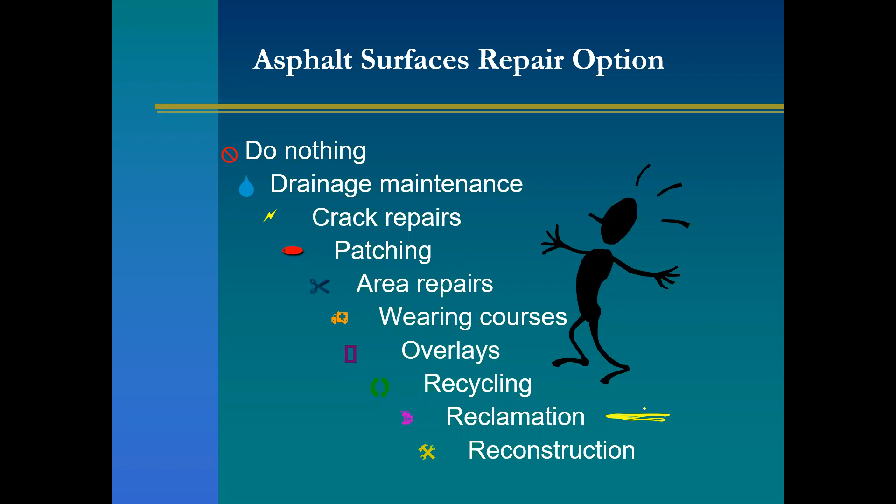Always going to bring up drainage. You know, there's only 3 things that matter. What are the 3 most important things when it comes to drainage at roads, Ed? Remember that joke? Yeah, drainage, drainage, and drainage. Absolutely. See, he can read my mind.

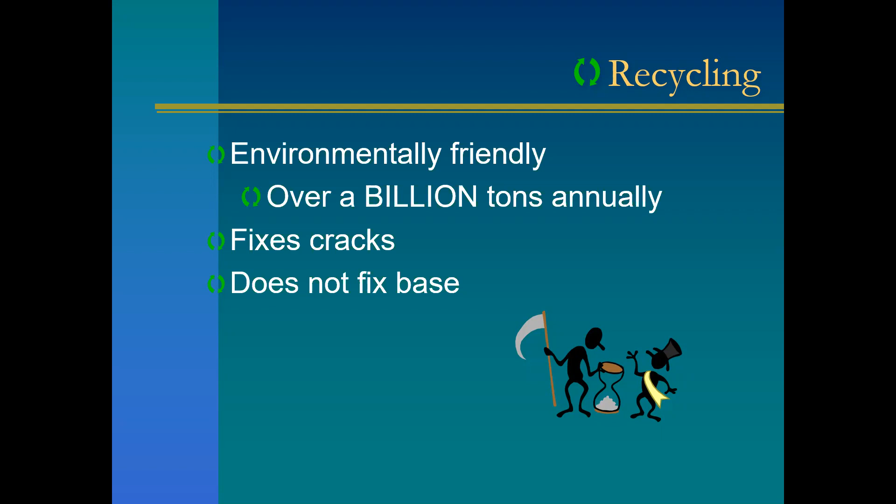Now, some people think of recycling when we talk about FDR or reclamation. We're not. I like recycling. It's environmentally friendly. We recycle over 1 billion tons annually in the United States of asphalt concrete. It fixes the cracks in the surface, but it's not fixing the base. And so when we're talking about recycling, that's not what we're talking about today in reclamation. And of course, there's lots of choices.

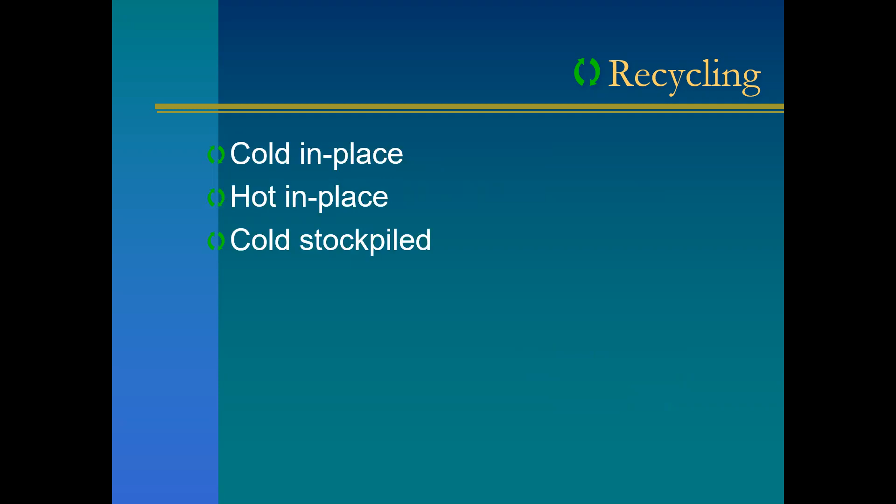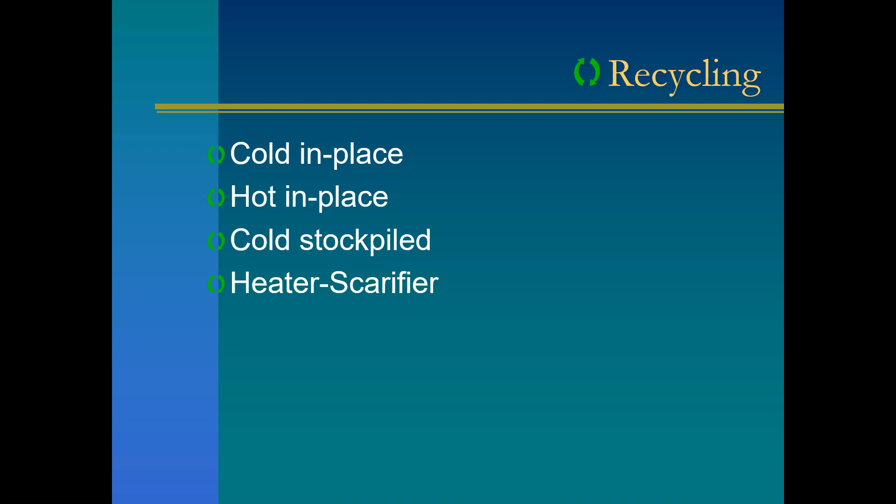Go ahead, Ed. Hot mix asphalt is the most recycled material on the planet. Yeah, absolutely. And we don't want to throw it away. It's too good. It's too valuable. Even when it's alligator cracked and starting to break up, it's still pretty good stuff. But we got to do it correctly. We've got to use good choices. But remember, recycling fixes the surface. Okay, so if we recycle the stretch of roadway, if there's a base problem underneath, we're not doing anything to fix that. And of course, there's recycling trains, and they work very effectively.

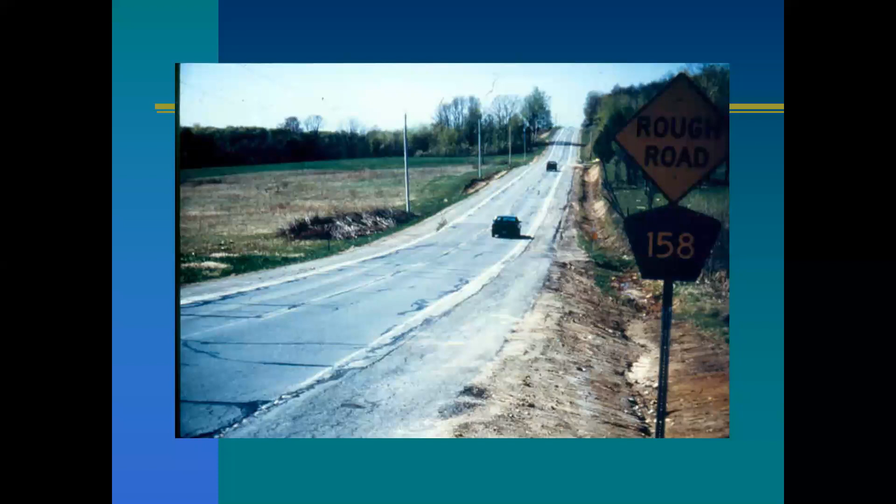So we talked about this again in a previous webinar, and you can take a road that looks pretty bad. If it's got good drainage and you maintain it properly and you recycle it properly, well, that road can be pretty good when you're done. But remember, recycling is dealing with the surface, you know, just a surface crack, maybe an old pavement that's starting to get just worn out with age, maybe a patch or 2, but not major issues underneath.

And you also have to have enough material there to recycle. Yeah, minimum 4 inches, hopefully 5. And unfortunately, a lot of local roads don't have that much material. Yeah, you got to make sure you have enough thickness. And we'll talk a little bit about the thickness you need at the end of the process. And we did that with another webinar as well.

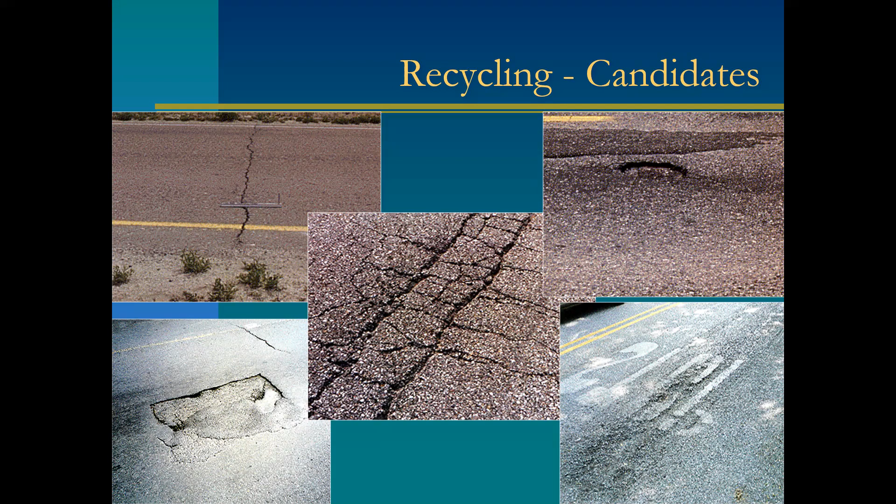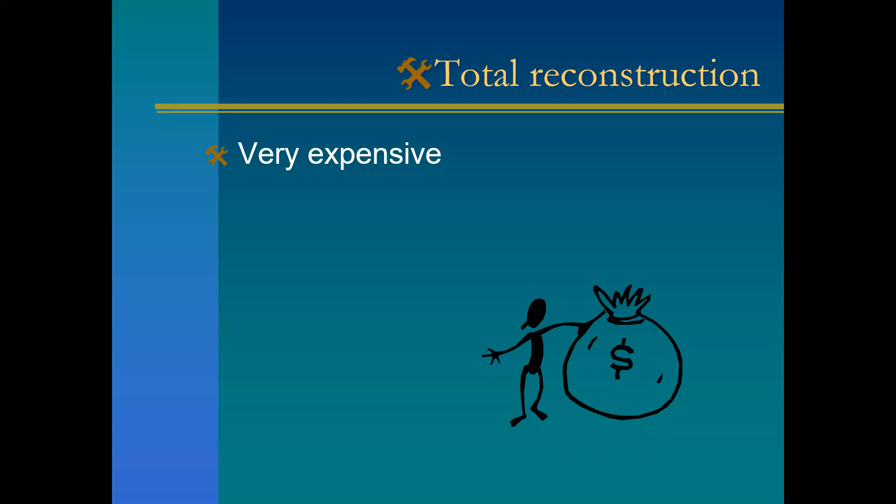And then the other thing people sometimes want to jump to is total reconstruction. Total reconstruction is very expensive. That's when we're essentially starting over, throwing everything away, putting in the big piles. It may be the only option, but when you're done, you do have a brand new roadway, so I like it. Most commonly, we see reconstruction at the local level when people are putting in utilities and doing major utility work.

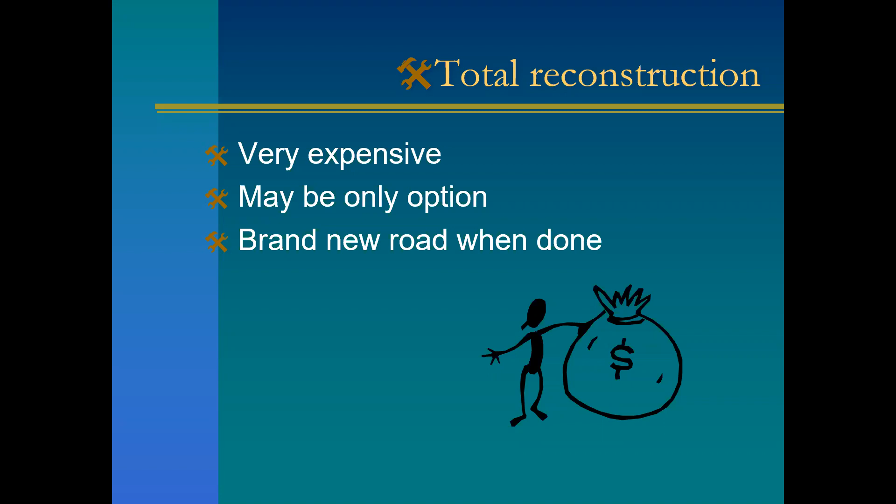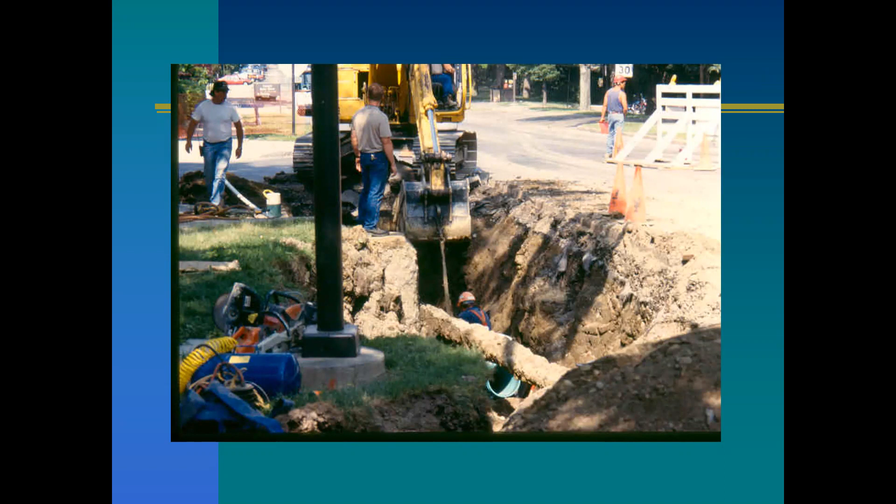And this is my OSHA slide, or lack thereof. We could spend a whole webinar just on this one slide almost. But the whole point is, if you're going to reconstruct a road, do it right. We don't want to use that famous motto, we do it nice because we do it twice. Let's build it up properly. And when you're done, you have a good roadway. This is actually a road on the Cornell campus that was built.

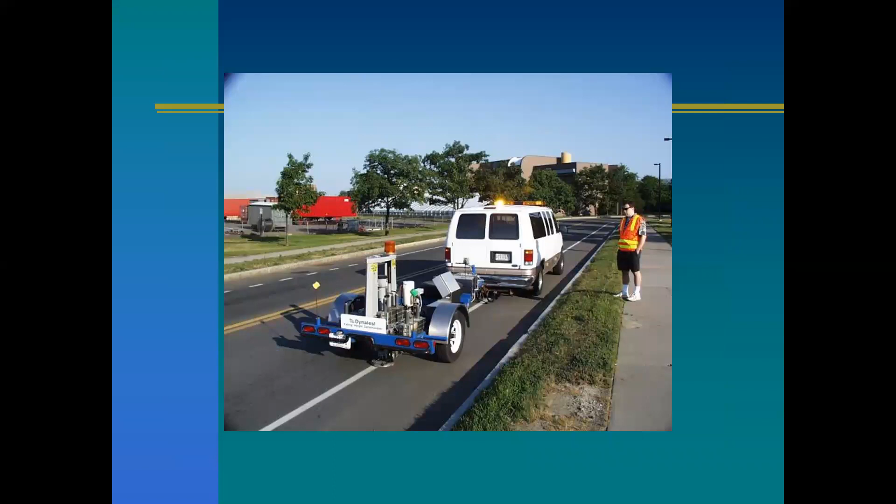Boy, it's about 19 years old now. And it does need a wearing course, but it's in pretty good shape. So what we're talking about today falls in that middle category between recycling and total reconstruction, reclamation and stabilization. It's almost a new road. It does repair the base, and it can be very, very cost effective, okay?

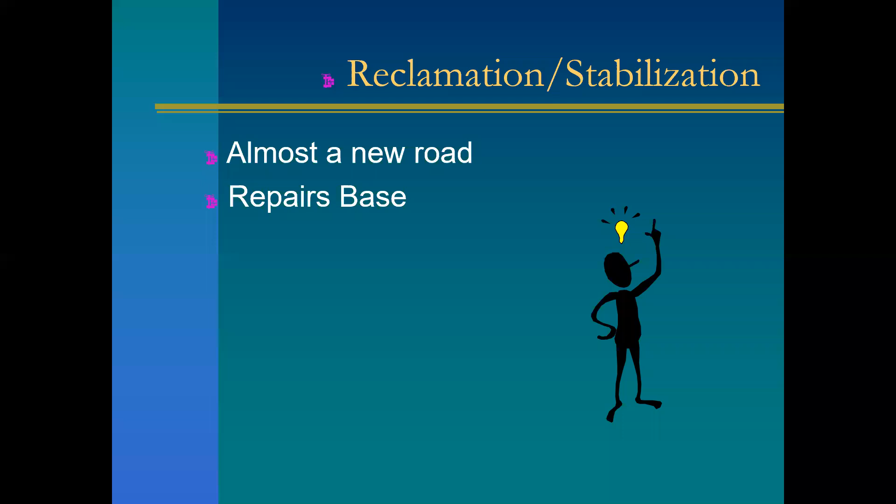But there's a couple of things to keep in mind, some keys. First off, you gotta pick good candidates and you gotta improve the drainage. If you can't do that, then it's not gonna be a good candidate. And then you have to choose the correct additive. You have to choose the correct technique for the reclamation at the end of the day, okay? What do I mean by that?

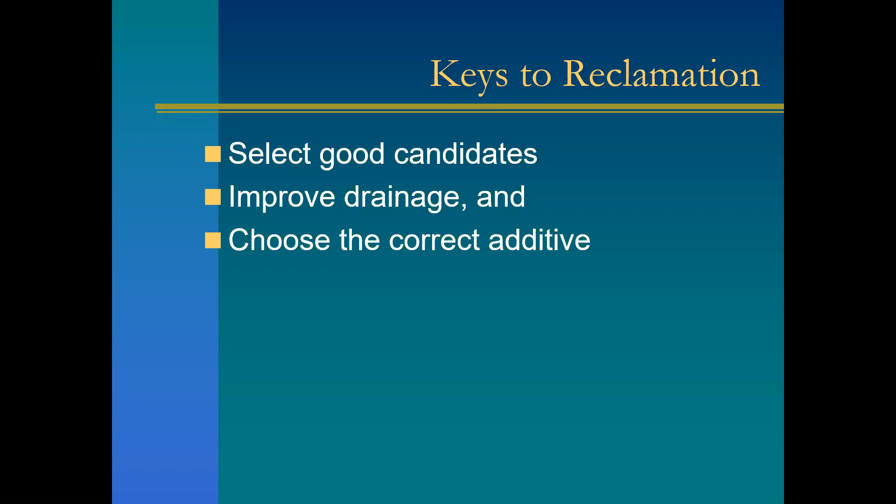Well, here's a chart. This is a textural chart that shows you the percentages of gravel, sand, and silt and clay in the base underneath the paved road and even on the surface, okay? It's one of the tech tips I mentioned earlier. What we want is the gravel content to be about 50 to 70% because that's where the strength is. We want the fines, the silt and clay, to be under 8%. And we need enough sand to fill in the voids. And so we'd like to be in the blue.

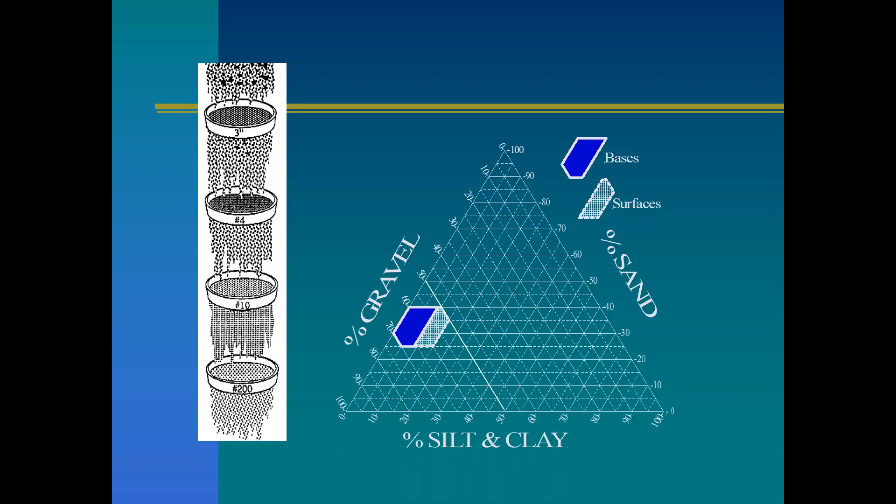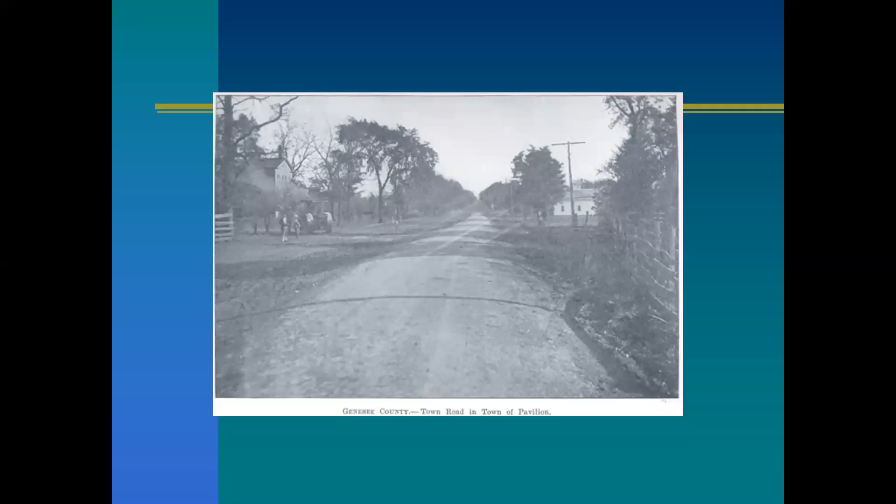But the problem is most roads started as gravel. And when we paved over the top of them, we may not have cleaned that quality of that gravel up, or it may have deteriorated over time. So we'll close up in on the good portion of the chart. If we've got a section of roadway, and let me make sure I got a yellow pen here. I do have a yellow pen. So if we've got a material that's a little bit dirty, it sits up in here in this dirty area. Might have made a good gravel surface, but it's not a clean base.

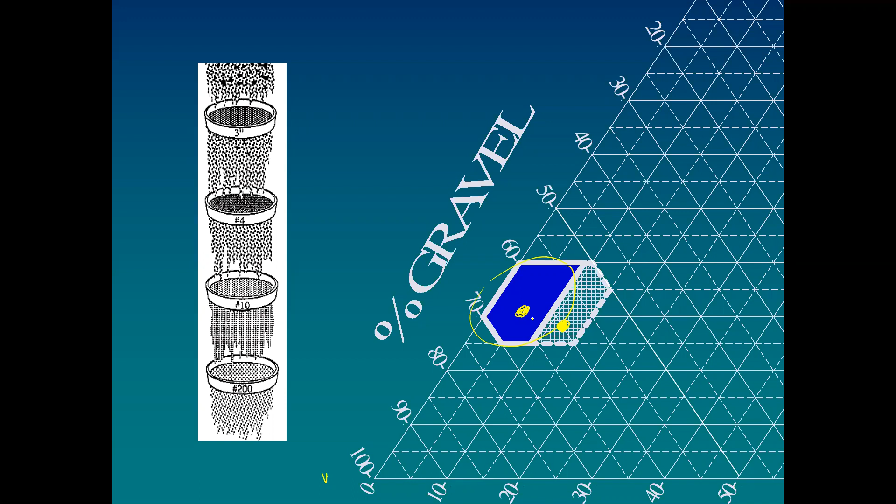Well, that's a good candidate to reclaim it and bring it down into the blue zone by binding up the fines, cementing the fines, or bringing in new gravel and blending it together so that when we're done, we're inside the blue zone, okay? Now, we're not going to get into the engineering techniques of exactly how that's done, but I do want to remind you that there are different ways to stabilize, to bring materials from outside the blue area into it, by binding or cementing or mixing, okay? And so there's different choices.

You could just pulverize the existing material and blend it all together, and when you're done, the blend is inside that blue zone. You could do mechanical stabilization, which is a fancy way of saying, I'm just going to bring in some rock, add it to what's already there, and when I'm done, I'm going to have a cleaner material.

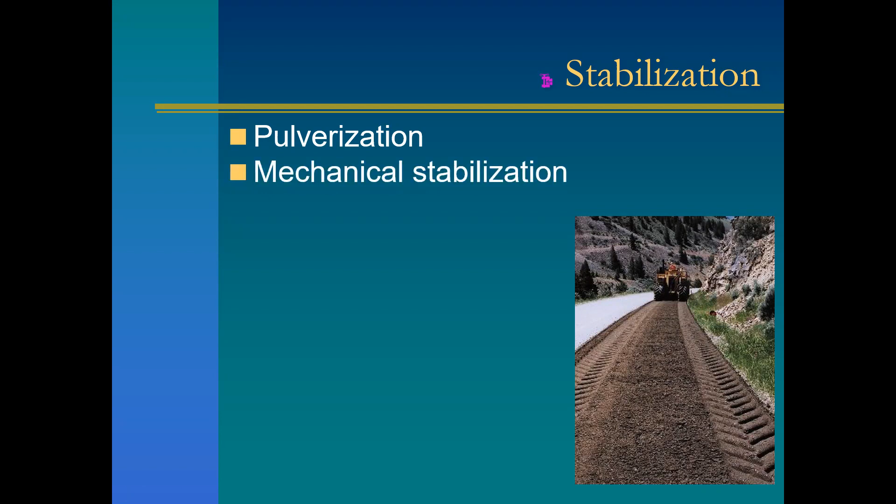I could do chemical stabilization where I bring in calcium chloride, a salt, to help reduce the frost issues. I could bring in cement or fly ash to help bind things up, or I could do asphalt stabilization with bituminous products, emulsion or foamed asphalt, or a combination thereof, okay? We're going to go through each of these in more detail, but before I do, let me go to poll question number 2.

And let me see, which ones of these have you done? You can select more than one choice. So I'm showing you mechanical stabilization, calcium chloride, cement, lime fly ash, emulsion, or foamed asphalt. Which of those have you done, had experience with?

And Ed, we don't get to vote. That's okay. I never do anything. Just watch. Just watch. So we'll see how many folks have clicked through here. We'll give them a couple minutes. Well, actually, we'll give them about another 20 seconds or so, see what people say. Probably should have put a none in there as a choice, but that's okay. Okay, so we're in the polling.

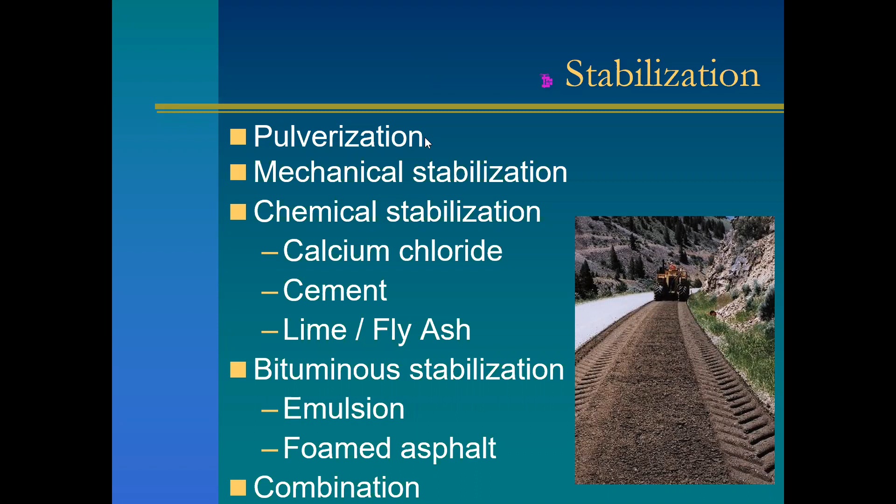Okay. So we can talk about different techniques when we're done. This was a demo we did at the highway school a few years back where we did cement stabilization. In fact, there's Lynn Irwin, the old director, as we were doing the road, and that's the product after it was done. If it's done well, stabilization works really, really well, but you've got to do it correctly. If you don't, you can lead yourself into trouble.

So now I'm going to let Ed talk a little bit about the full depth reclamation process. I'm going to do my best to keep up with you, Ed, on the slides. It's all yours. Sure, thank you. We're going to go into a little more detail about FDR right now. The New York DOT has a definition that full depth reclamation is a recycling method where all of the asphalt pavement section and a predetermined amount of underlying sub-base material are treated to produce a stabilized base course.

It's a pretty good definition by an agency that really doesn't do much FDR, probably almost none, because they really don't have a whole lot of base failures because most of their bases are Portland cement concrete pavements. Just wanted to comment here that there's not a whole lot of work zone traffic control in this picture. Looks like an idyllic place to do some reclamation.

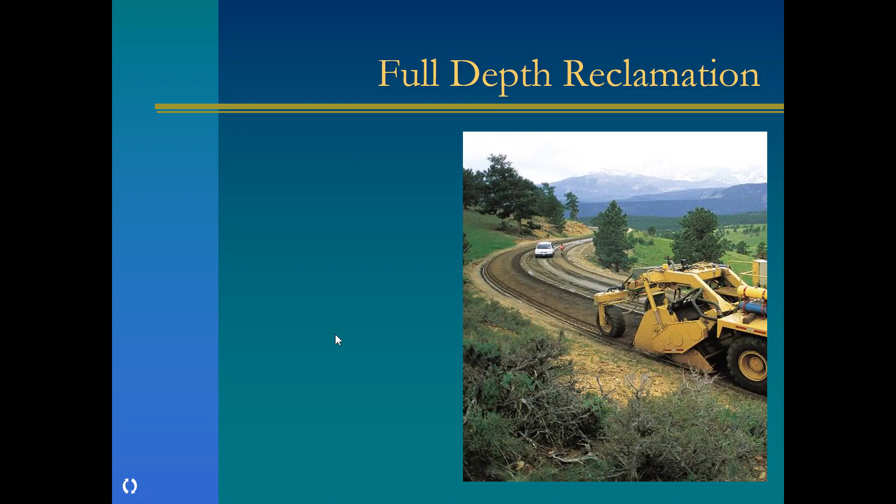So when do you use FDR? As Dave already said, inadequate pavement structural strength. Mostly it's one of your last choice treatments before reconstruction. You can't recycle a pavement that has severely inadequate structural strength unless it's in very localized areas. At that point, you're going to have severely cracked pavements, poor ride quality, bumps, holes and potholes, or some rutting and corrugation, slipping, delamination and/or stripping, and also some raveling and even bleeding. FDR can fix almost all of these issues.

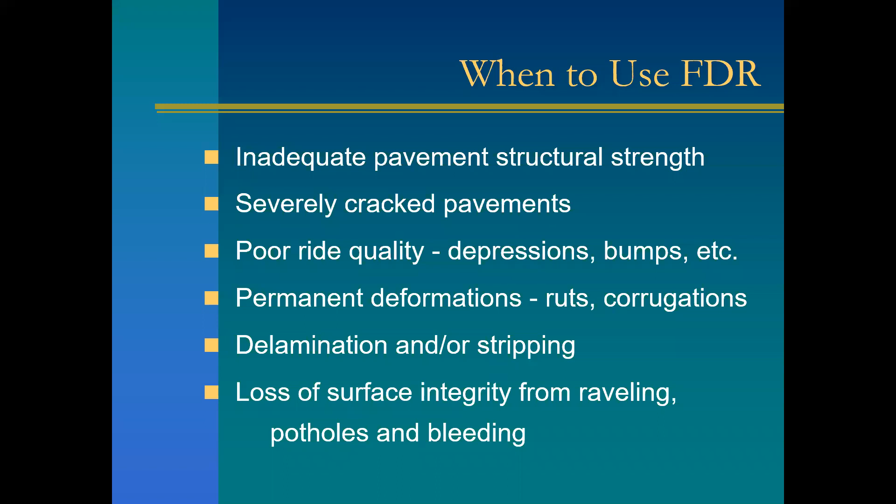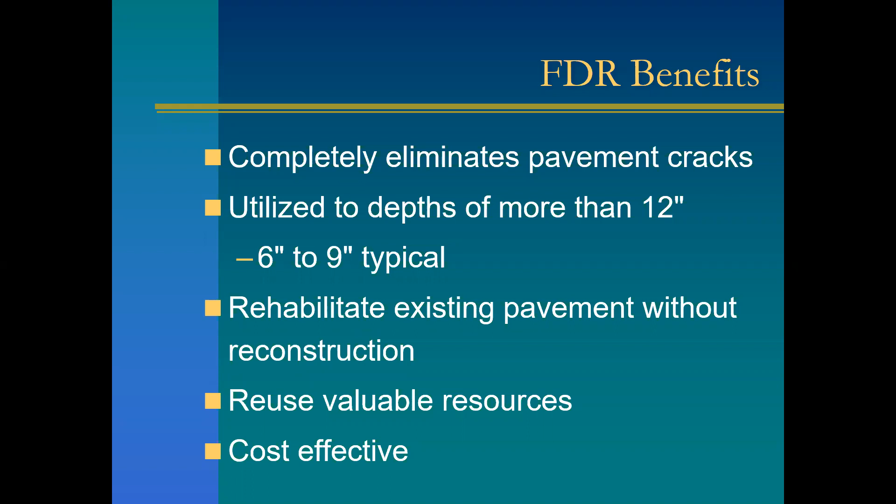And what does it do? What do you end up with? Well, it completely eliminates pavement cracks. You can FDR to more than 12 inches, but that's pretty unusual. Typically, we'll go 6 to 9 inches. You're able to rehabilitate the existing pavement and some of the base without reconstruction. We're being environmentally green, reusing valuable resources, and it is cost effective. The most important thing is that we get the structural strength in the pavement back, I believe.

I agree with you, if you've got good drainage. Well, you have to address the drainage first. You have to go out and recut the ditches if necessary, find some areas where maybe there's some springs coming through, address the culverts, etc. Because if you don't, you're just putting lipstick on the pig.

Some of the equipment used for FDR is very specialized, and some you see every day. This road reclaimer is very specialized. It's a big piece of equipment, 400, 500, 600 horsepower. It does a lot of things, and we'll get to it in a little while. The usual grader you see all the time. Rollers, some you see all the time, some a little specialized. Water truck, dump truck, stone spreader, and you've got to get the additives applied in a calibrated manner. Sometimes you do that with the reclaimer, and sometimes you do it out ahead of it.

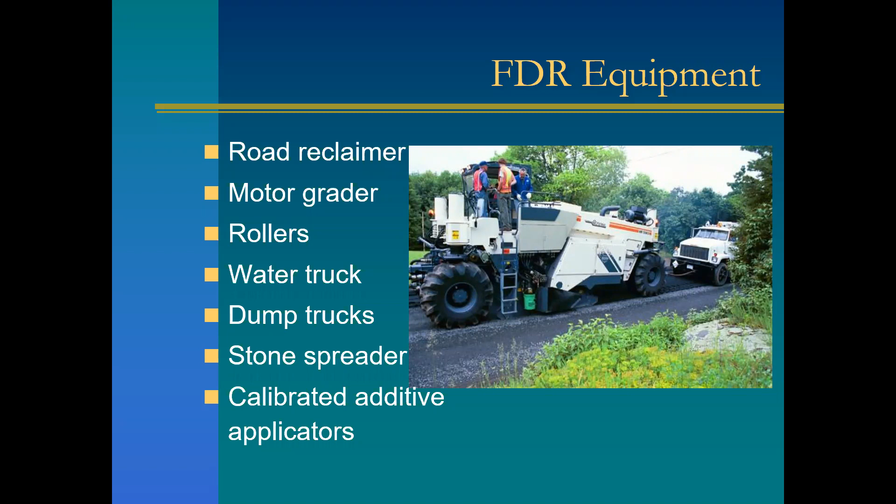Yeah, yeah. Well, I've been underneath a regular milling machine while the guys changed all the teeth, and it's kind of fun to see. I mean, it's horrible to actually have to do it.

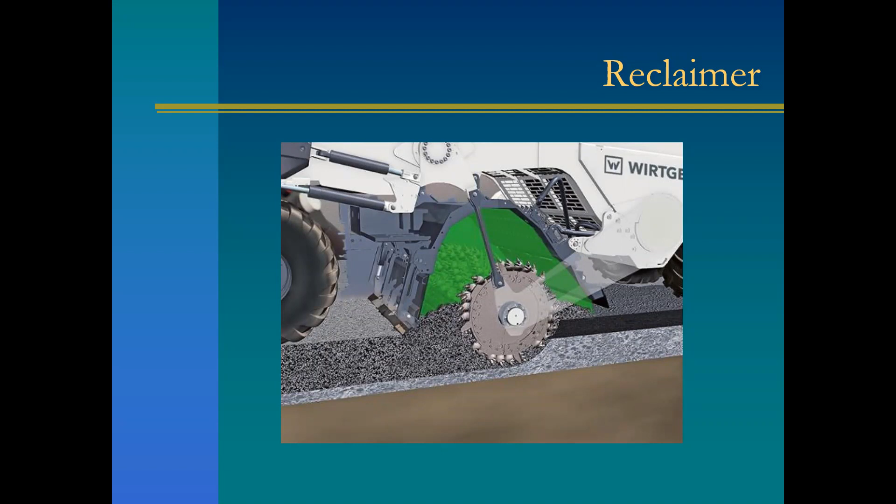Next, we're going to see another schematic of a reclaimer. This shows the actual operation. The machine is moving to the right. The milling drum is moving in an upcut direction. It's going down into the granular sub-base material, taking the whole pavement up. And if you notice up in the top there, there's a little injector where you can inject water and or fluid stabilizing agents, calcium chloride, liquid calcium chloride, etc. Almost all the modern reclaimers now have those installed.

And this particular picture I noticed doesn't show the baffles. There have to be some baffles in here, otherwise you get too big of chunks. You've got to make sure that it gets ground up with these upcut machines. That's pretty important. Correct. Yes, yeah, because the regular milling machines do use an upcut, and they take the material away to be crushed at a plant. Whereas if you do a recycling project, you've got downcut machines that actually size the material better. Yep. Dave will talk about the additives that are injected into the drum a little later.

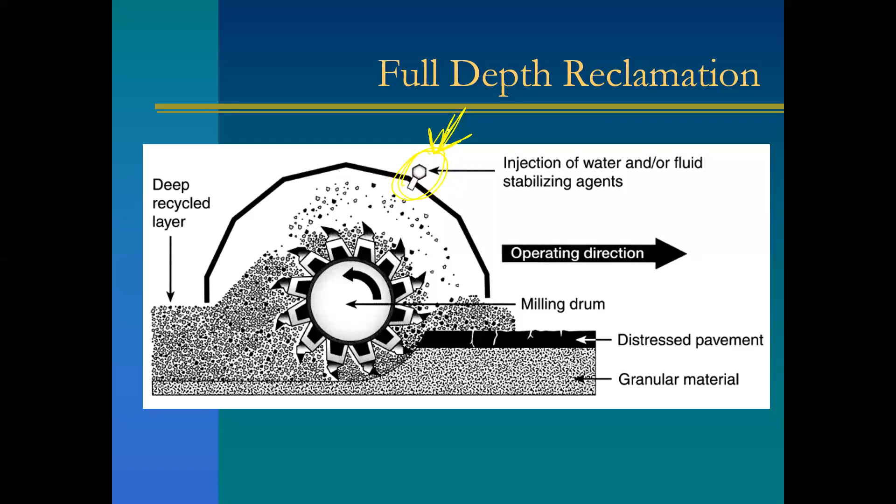So full depth reclamation, I've got another definition for you. This one comes from Dave. It involves rototilling a road and blending the pulverized pavement with its underlying subbase or subgrade. Many times a stabilization such as asphalt or cement is added to increase the strength of the reclaimed base. It's a pavement rehabilitation technique in which the full flexible pavement section and a predetermined portion of the underlying materials are uniformly pulverized and blended together to produce a homogeneous stabilized base course.

And if I got a little distracted there, it's because the town highway department's just going down the road in front of my house, patching potholes. And they do have a roller, and he's actually going to do more than one pass. So he's compacting it. That's good to hear. Absolutely, and I think it's definitely hot mix. Let's see, 3 passes, that's it. Well, hopefully it'll last.

So during the construction process for FDR, analysis and testing is probably one of the most important parts of this, besides actually doing the work. Not all steps are in every FDR project. This is kind of a typical list. Usually the contractor will do the analysis and testing, unless you're a state highway agency and you have a lab that you can use. But it's important to understand what's going on so that if the contractor says to you, I'm going to use X additive, you can say, well, explain to me why, and you can have some understanding of what they're going to do.

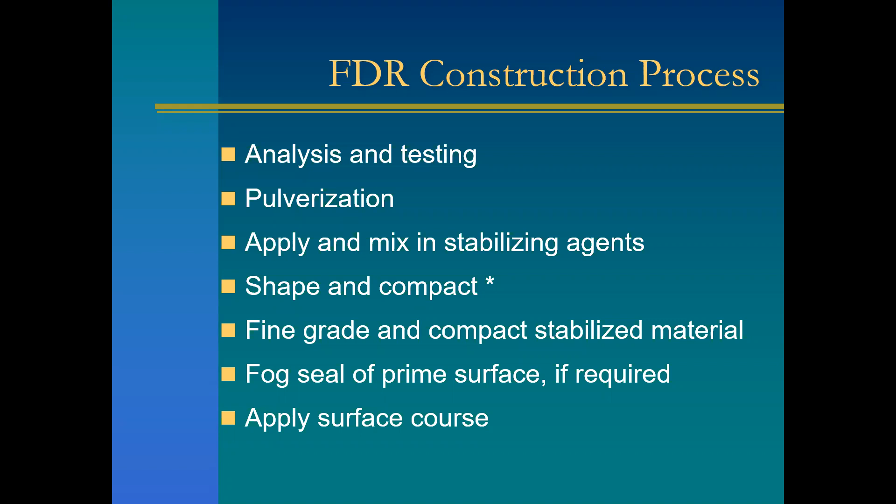But the key is you've got to do a test. You've got to get underneath and see what you've got. You can do cores. You can do a larger test pit, which I like. You can also just do a small, like a 3x3 square, and dig down. But the key is you need good quality testing, and you need enough of it. That's probably the biggest issue I see, is we try to do one test for a whole long stretch of highway.

How many tests would you typically see in a mile, Ed, for the work y'all were doing? It's 4 to 6, I believe. Yeah, 4 to 6 is typical. So you may not do a test pit in every single case. Maybe you use small holes for most of them, but 1 or 2 test pits, especially where you're concerned about drainage or what's underneath, can be very helpful. So we'll do 6-inch cores. Yep. And you do it 1.5. We'll talk about it a little later, but it's 1.5 times the depth of the FDR. Right.

So candidate selection: low volume roads, less than 2,000 AADT, and that's kind of critical because maintaining traffic on these kinds of projects is difficult, and you can't have 8,000 vehicles coming up and down the road while you're trying to do an FDR project. Well, there are people who do them. I know there are. The challenge there is the traffic control almost as much as it is the QA/QC on the FDR itself. Right. Well, it becomes cost ineffective if you have to do that kind of work. But people have done it. I've seen people do chip seals on I-95 in Virginia. So there are ways to do difficult projects. Sometimes you have to search for the solution.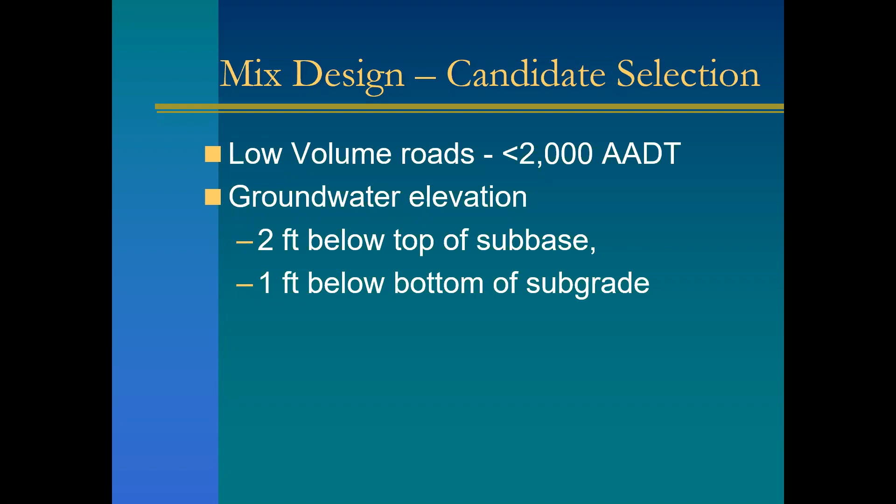Yep. Groundwater elevation, and this is important. The groundwater has to be below the subbase by 2 feet, or at least a foot below the bottom of the subgrade, because if you have groundwater coming into your project, it's a recipe for disaster. And for those who are listening, what'll happen is the water will actually be pulled up by capillarity right into your new material, and it'll be too wet and it won't survive and break down in the spring. So yeah, it's part of that drainage issue. Okay.

Now this is a little bit of what comes first, the chicken or the egg. You've got to determine the full depth reclamation depth, somewhere in the range of 4 to 12 inches. Like I said before, it's usually 6 to 9. If you know the road history and you know how much blacktop is there, or if you know how much gravel is underneath, you can pick a number. But the number will be determined after you do the coring. Your core should be 1.5 times the depth you're talking about. So if you core somewhere around 12, 13, 14 inches, you should be okay.

You've got to do 4 per lane mile to get enough material. Plus, things change over the course of a project. You don't really know how many changes in road cross section there are, unless you've been on the highway department for a long time. And then once you've done the coring, you can adjust your depth. And so you may wind up sometimes purposely going a little deep with your cores just to be sure. Absolutely. Coring is cheap. Usually the contractor does it. When I was with the contractor, we did coring for nothing. And even if we didn't get the project when it went out to bid, that was just considered a cost of doing business.

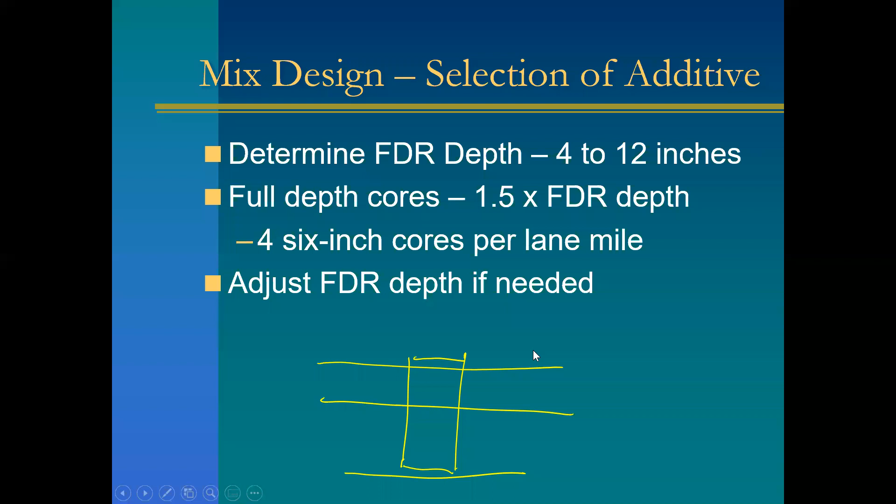Now, this is where the contractor's lab comes in. They're going to test for moisture content, sieve analysis, hydrometer particle size analysis, and liquid limit and plastic limit. And this is the kind of stuff that I've never done. That's really beyond my capability, but I know our lab guys, when I was with the contractor, knew it backwards and forwards. And when they came up with a recommended additive, it was because they were testing and finding out what was going on in the soil.

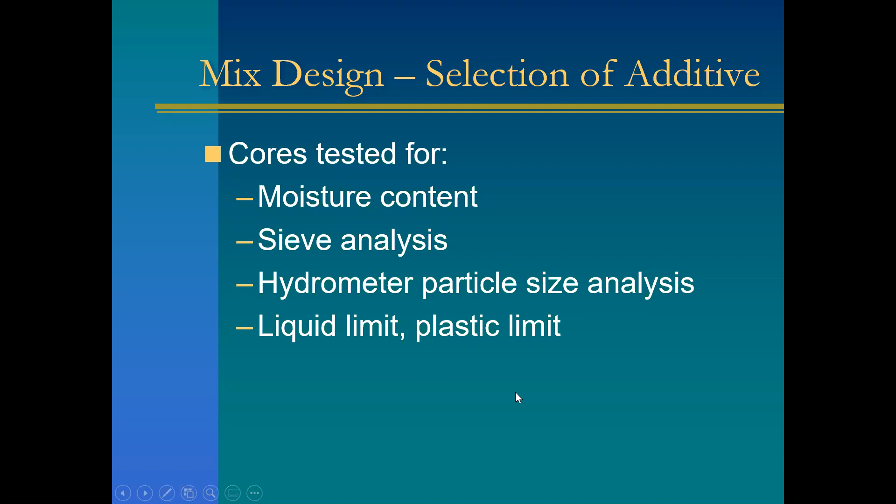This is actually pretty important. We're just about to launch into a project where we're going to look at these techniques for choosing the stabilizer. We may add a test to this list, the sand equivalent, when all's said and done, but it's really critical to do these tests, because if you choose the wrong stabilizer, you can actually make the problems that you didn't want in the first place. We'll talk about those when we talk about stabilizers. Right. Yeah, I was going to say Dave's going to address all this: what the contractor does with these results a little later on, picking an additive.

Going to look at a few reclaimers here. This is one of Dave's photos. He told me it's an old Bomag. I've never seen this piece of equipment. I'm sure it's got a milling head inside that container there.

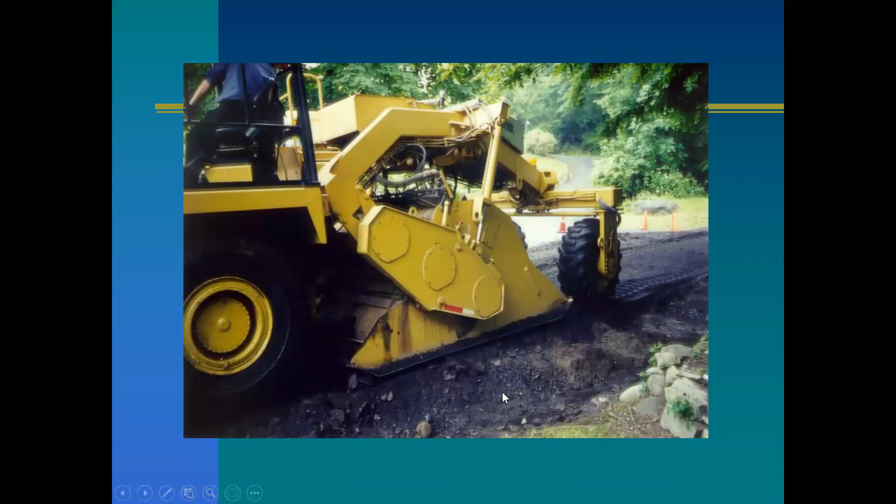The reason I like this picture, Ed, more than anything else, is to show that you can use FDR in some pretty tight spots. This is a dead-end road with no right-of-way. Literally, it's a road by use, and they actually were able to reclaim the road in an extremely narrow right-of-way. Almost a perfect application of FDR technique. Okay. That's why you're using it.

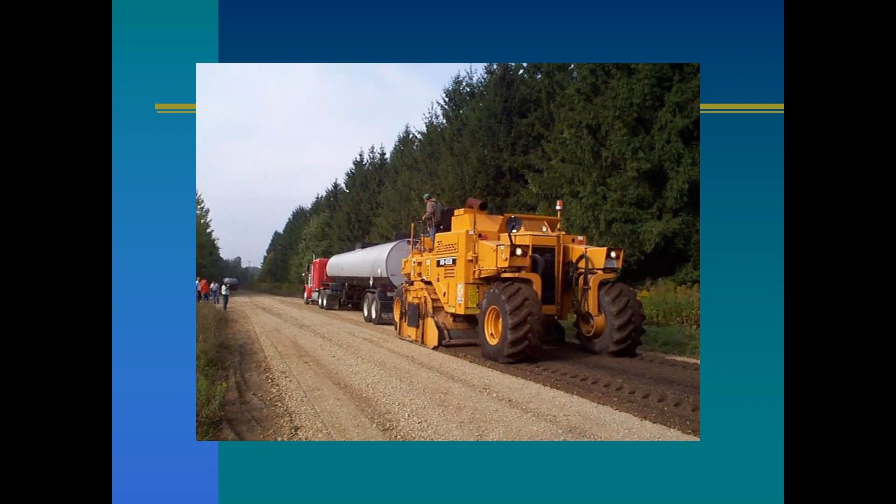The next is a Caterpillar brand. There is a tanker in front feeding liquid calcium that's being injected into the milling head, and that's why the material looks a lot darker when it comes out the back of the machine. I'm not sure where this picture was taken. It's a U.S. Forest Service road out west. It was actually taken by Lone Urban. Okay. Looks like they're doing a nice job. I think the other side of the road has already been done, correct? I think so, yeah. And it's cured a little bit.

Here's the old Bomag. I know a lot of people, when I was talking to town highway superintendents, have used Bomags in the past. This is basically just using some water. Looks like we got some drainage issues on this road. Hopefully they have addressed them, or they're going to sometime soon. You got any comments on that photo, Dave? The main thing is that they were just trying to adjust the water content before they compacted it. You need to have the right amount of water. That's part of the testing process. Absolutely, absolutely.

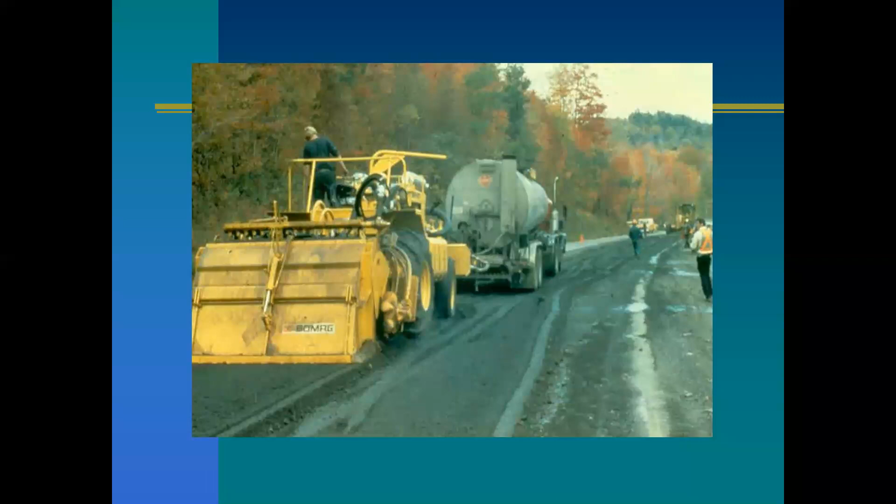Here's a show of the rolling operation here. There's a pad foot roller, sheep's foot roller some people call them. I don't know how many people have actually seen one of those outside of reclaiming jobs. It's kind of used on deep soil compaction, because that's what it's meant to do. You got to get that pad foot roller up in the back of that machine as close as you can. And you end up getting a more concentrated compaction with a pad foot.

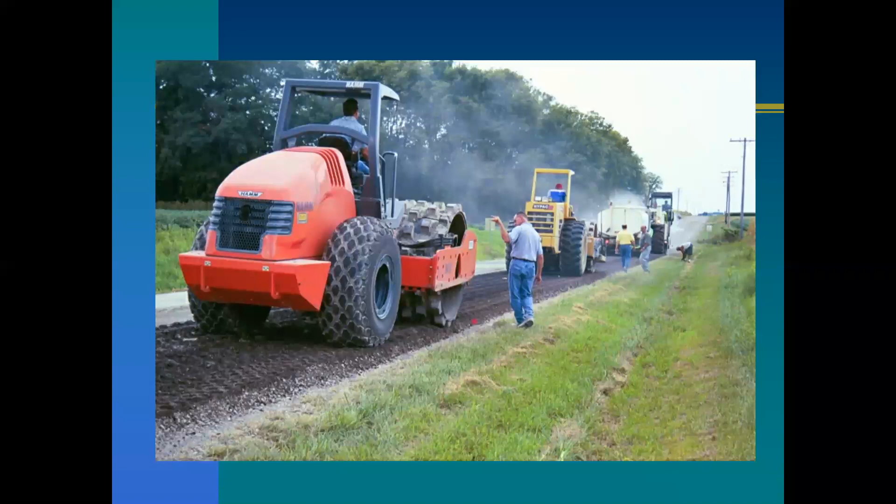Just the process for grading and compaction here again is a pad foot roller doing the first pass behind the reclaimed material. One of the things important about the sheep's foot or pad foot rollers is they knead the material into place, and they maneuver it around as opposed to just rolling over and trying to press it down. So that's why it's pretty important to use that in the first pass. Right. Well, like I said, it's done on deep soil layers, and that's what it's designed for.

Actually, the sheep's foot name comes from sheep. There were people, probably in jolly old England, that used sheep to walk on paths and compact them, or they were just doing it as part of what sheep do.

The grader follows up for the first pass after the sheep's foot roller. Picture of a grader here, garden variety grader. I haven't worked with any of these ones that are controlled by satellites, but it's quite an innovation, and I wonder if any of you folks have actually seen them yet, because they're making their way in. Well, let's see. Raise your hand if you've actually seen a satellite-controlled grader operation. See if anybody raises their hand here. A couple of people have. Oh, okay. Cool. But not many. Okay. It's coming. It's coming. Yeah. You never know. They'll be driverless after that.

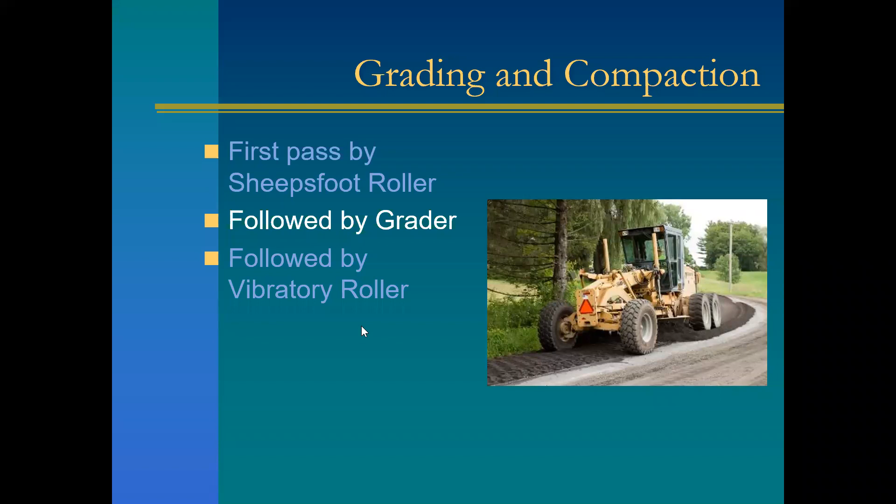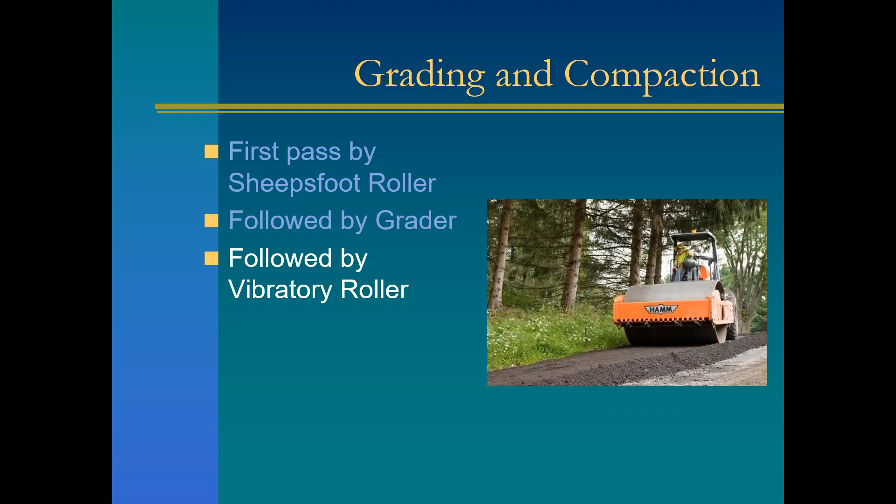And then after the grader, you follow up with a vibratory roller, typical garden variety single drum vibratory roller. As I said earlier, FDR is usually done 6 to 9 inches. You can do 12 to 16. That's going to seriously slow down your production rates, which average anywhere around 25 feet per minute, which basically computes to 1 to 1.5 miles a day of a 2-lane road.

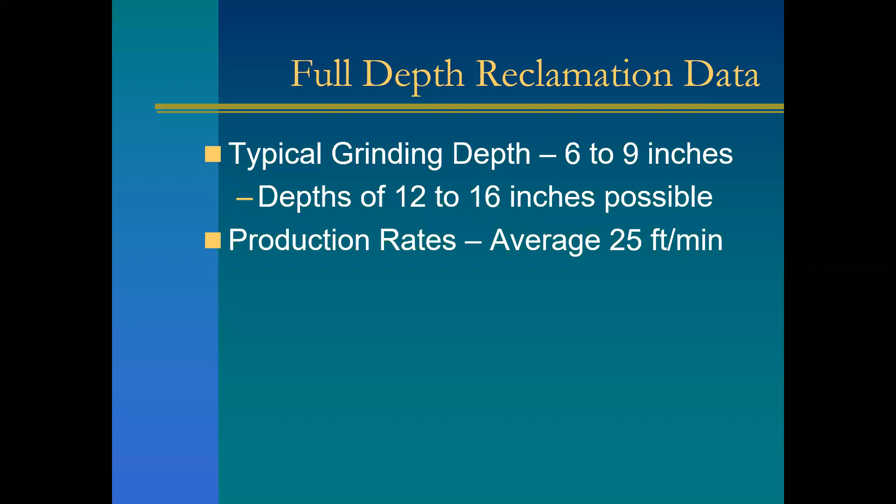And then afterwards, you need to apply a wearing surface. New York State DOT would apply 4 inches of hot mix asphalt. I've seen people do double and triple chip seals. Later we'll talk about costs, but if you do a double or triple chip seal, you got to remember to redo it in a few years. The hot mix will probably last you 12 years with proper maintenance, where the chip seal, you'll be back there in 6 to 8. Well, it depends on the traffic, and that's why you need to design the road to handle the loads and the thickness. And we talked about that in a different webinar earlier, making sure you get the right thickness.

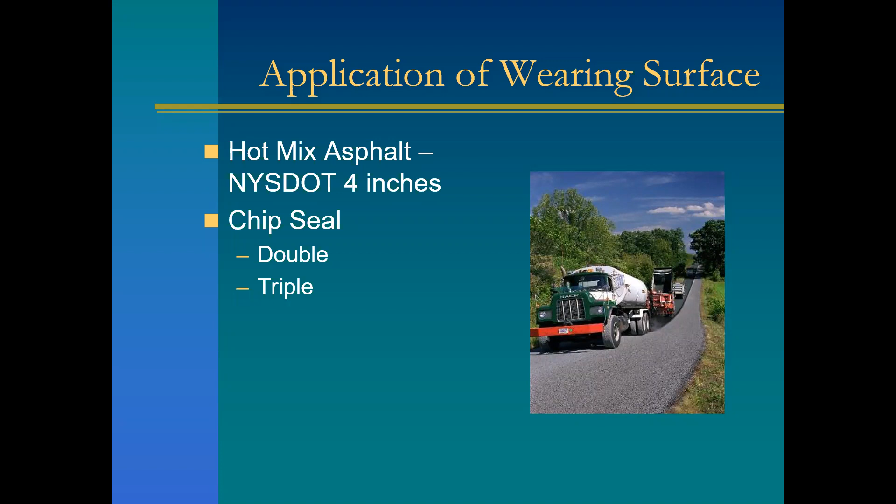So, I think I'm handing it over to you for the videos, Dave. We'll start the video. Let's see the first video. There's no sound. Actually, let's see if the sound works. It may not. This is the soundless one.

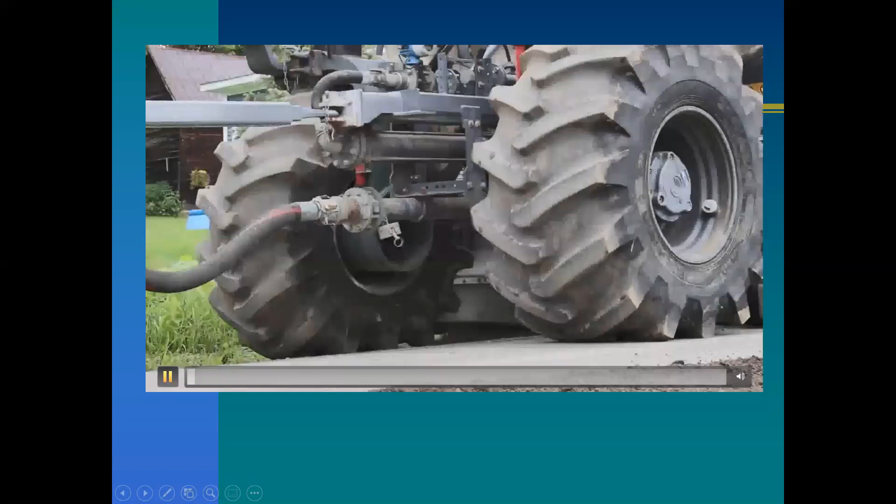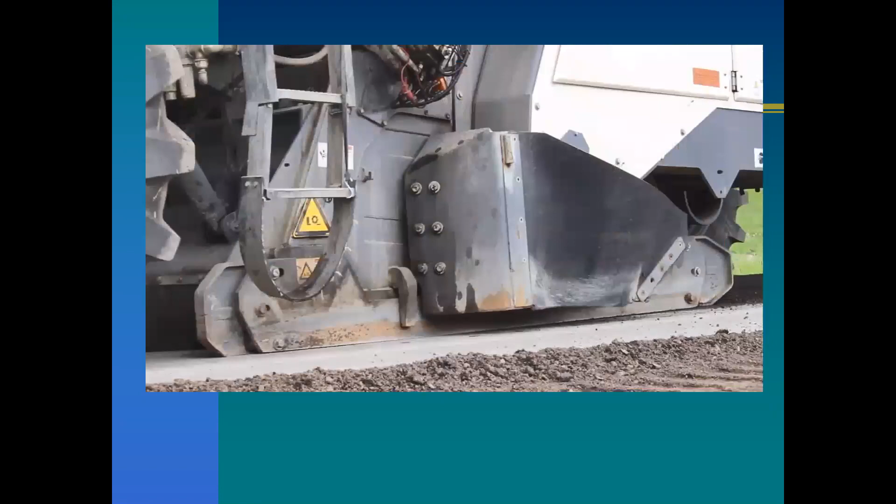You took this video or shared it with us, so this is the reclamation machine just going down the road. The Gorman reclamation machine. It's a Wirtgen. It was pretty new a couple of years ago. It was brand new for them. It is a beast. It is a beast.

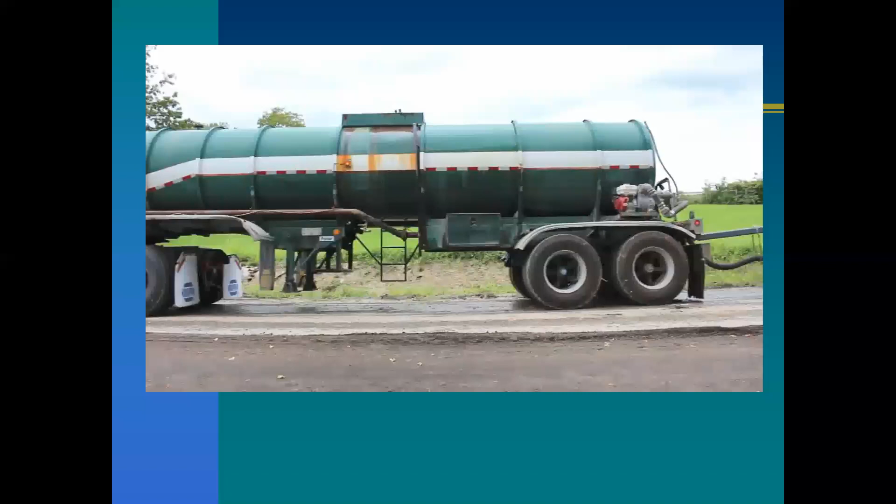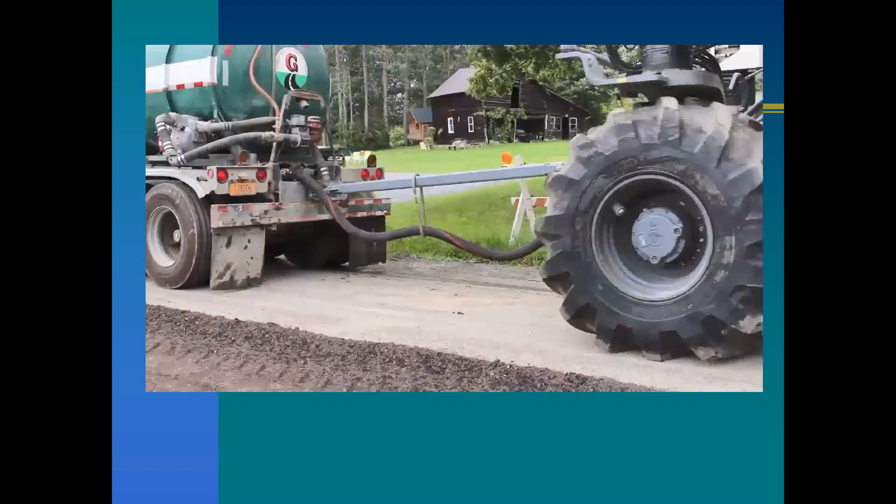Water truck. Okay, cool. Going down the road, cutting everything up. There it is there. So were they adding anything other than water, or was it just water in this case? I think that one might have been water, or it might have been calcium. In the 10 years that I was with Gorman, I don't remember them doing anything but calcium. They have the capability to do emulsion and foamed asphalt, but you know, the costs were a little more, and most people really didn't want to do it.

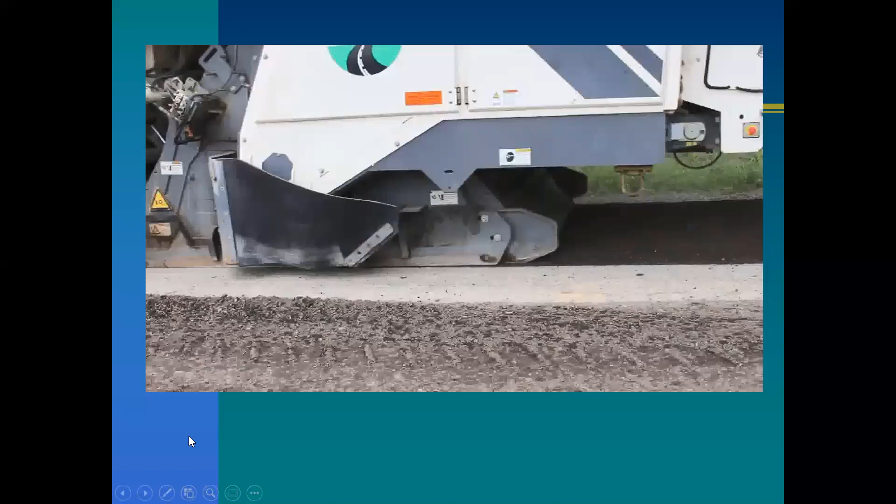This video is not working very well on your machine, Dave. Well, it's the nature of the internet. Yeah. Let's try the other one. This is the one from Wirtgen, and we'll see if the sound plays today. It wasn't playing earlier this morning. Can you hear it or not? I don't have it. Nope. No. So in this case, I made sure I got the sound in my head.

He's putting down, in this case, cement ahead of time. That's what the white material is. Then they're adding water and other chemicals. And then they're actually sucking everything up into the reclamation machine. Same kind of one that was in the video you shared, Ed. Yeah, the Wirtgen. Yep. And this is available on the internet, and we'll link to it as well. Okay.

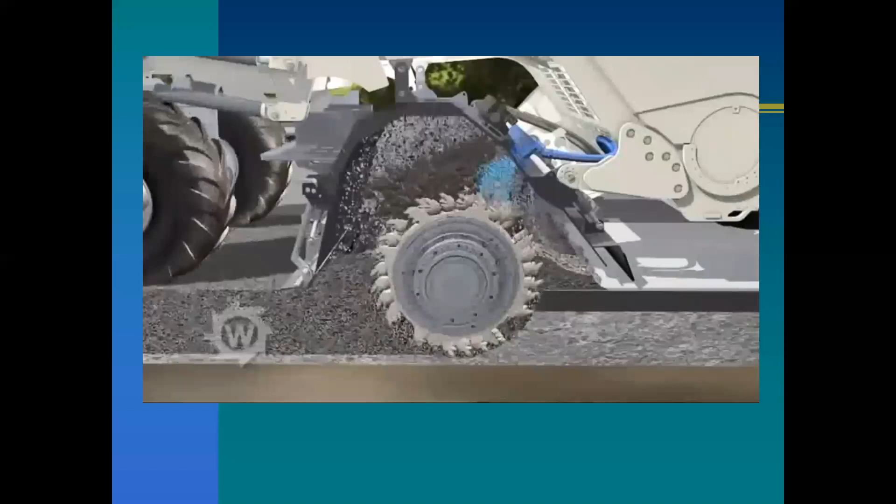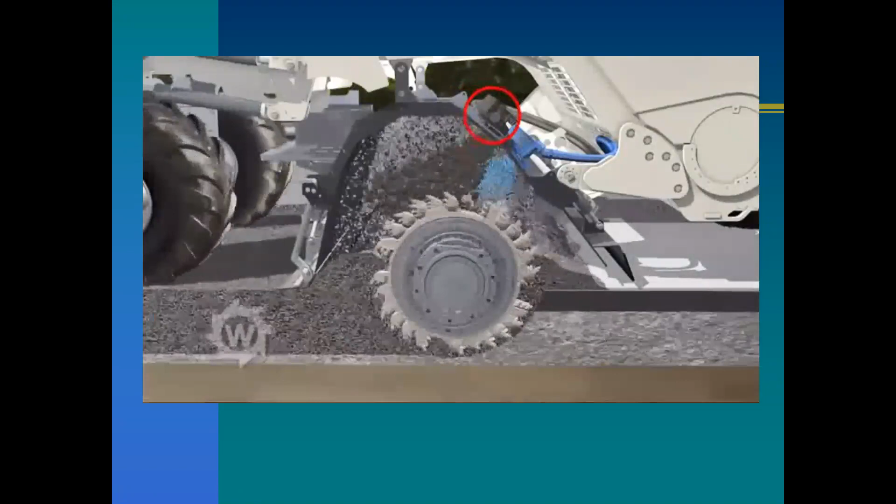That's the schematic of it. And there's the injection spot you talked about earlier. That's why I don't think a video camera would see much inside here. No, you're right. Hey, you can dream. Yep. But it does mix it up pretty well. You can't go too fast, though, because if you go too fast, you'll actually get chunks out the back. So you got to keep the speed just right.

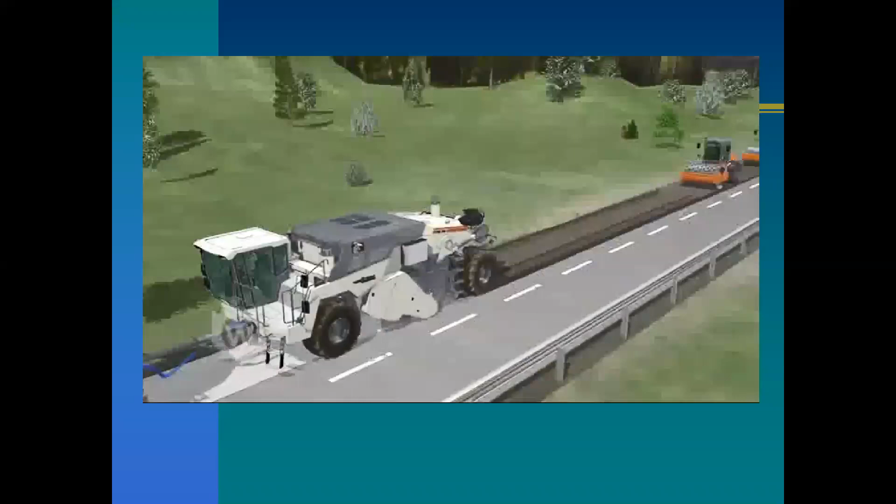Like all pavement treatments, how many people have driven down a road where the contractor put down the hot mix and rolled it too quickly, and you get the little undulations every foot from the vibratory roller being set wrong because they went too fast. They're actually using a pneumatic on this too, if you see. Yep, they used the pneumatic roller.

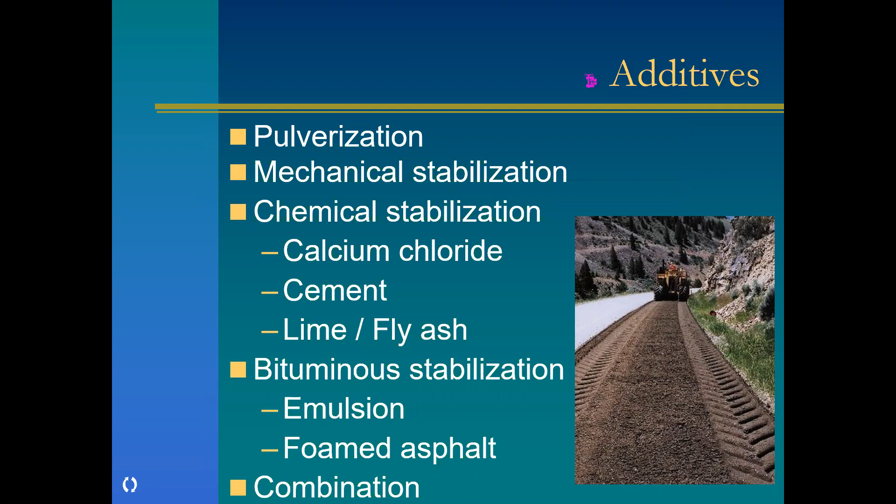Pulverization. Essentially you just grind everything up, and at the end of the process, you mix the asphalt with the base, and hopefully that mixture has the right fines content. You're just pulverizing what's already there. That works really well if you've got a fairly clean base, either an old asphalt surface or just a little dirty and you want to clean it up. You might bring in some rock if you need to get the fines content down, but it's fairly common. In fact, 45% of you on the webinar today have used that.

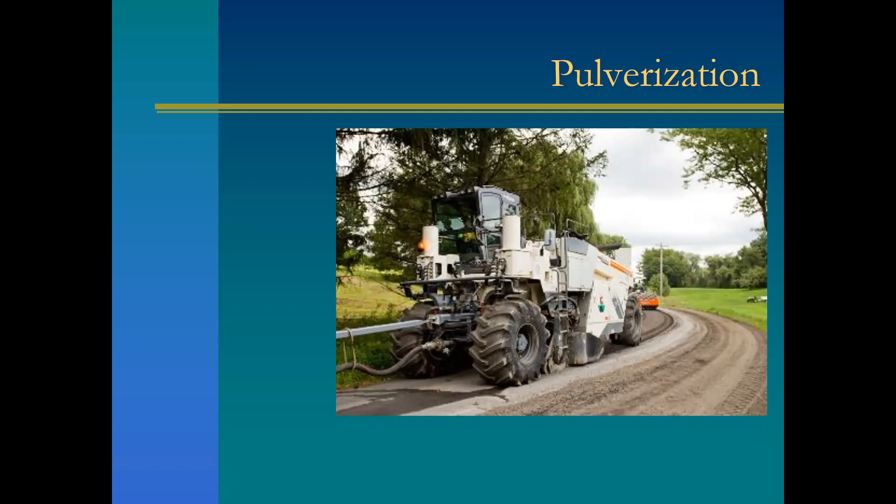You can add calcium chloride. This is best with well-graded material. You'd like to have low fines content, minus 200 stuff. You're going to add a little bit of calcium chloride to reduce the frost susceptibility. It helps with compaction and strength, but you're not changing the fines content at the end of the day. So keep that in mind.

If you've got calcium chloride, you're reducing the frost issue, you're reducing the spring thaw. But if it's got too many fines, especially the wrong kinds of fines, it may not actually do what you think it's going to do. And if you've got a drainage problem underneath, it's not a good technique. But it can work very well because it reduces that frost action a little bit.

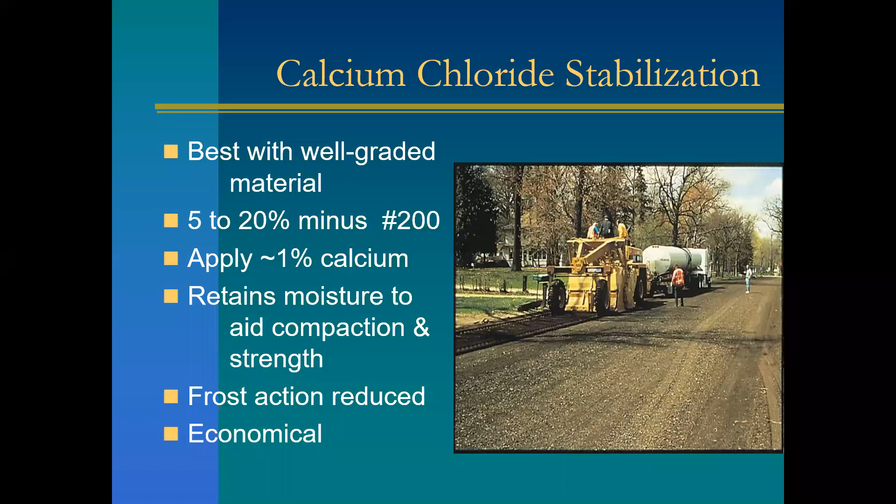Cement. What you're doing now is you're taking those fines and you're cementing the fines together as part of the process. All the small particles get bound up and you reduce the fines content that way. And it's typically 3 to 5%. The biggest issue I see with cement is too much. In fact, that's what happened with our demo.

When they bring the truck with all the cement, they don't want to take it home. So they went ahead and put it on the job site. And now I had too much cement. And if you get too much cement, you get shrinkage cracks. And those shrinkage cracks now are a place for the water to get in, and that can be a problem.

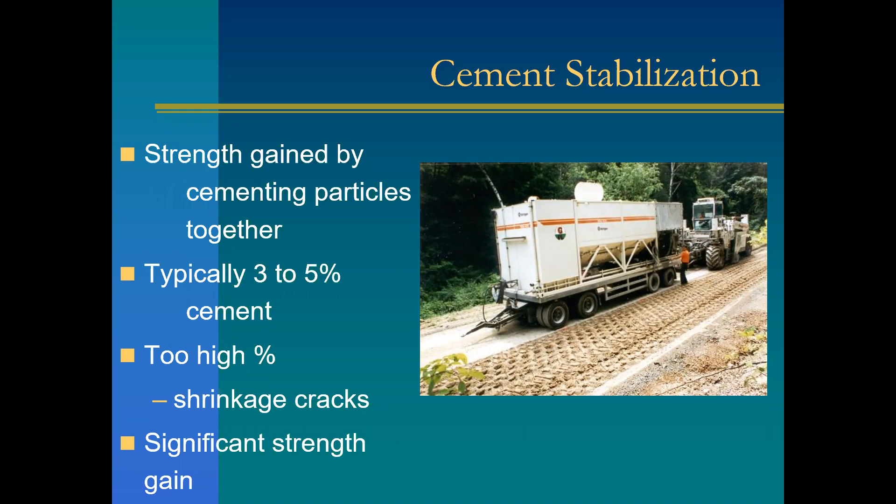You do gain strength with cement stabilization, but again, if you add too much, you can actually get to the point where it can block crack on you, and that's not good at all. So you want to add the right amount, not too much. And just to interject, that's a cement slurry machine there that Gorman got rid of before 2010. So it's not as commonly used in New York as it used to be. Yeah. Absolutely.

You're going to make a lot of friends this way. At least people are going to come visit you. You get phone calls, but absolutely, yeah.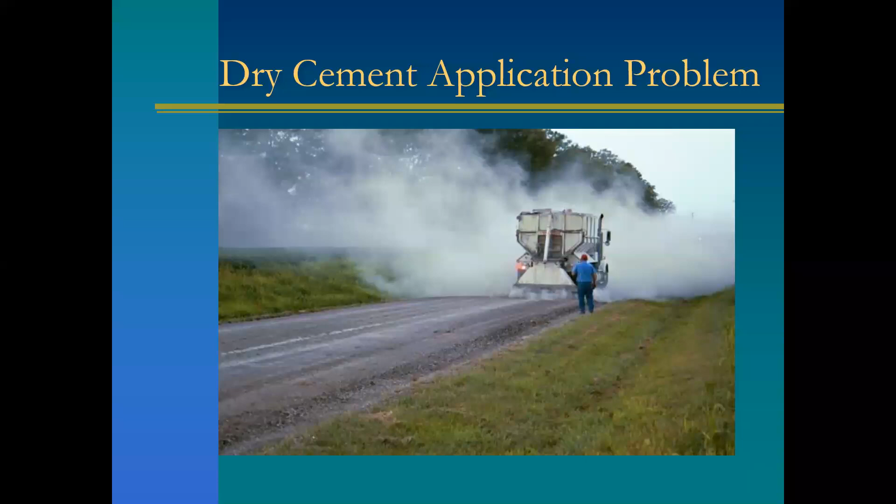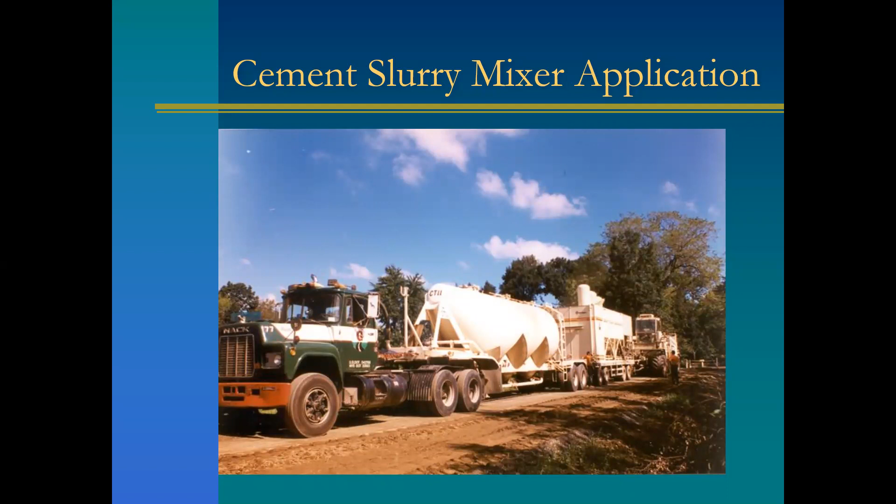This is more common, where you mix it in a slurry and either drop it right into the whole reclamation train or put it down on the road and then grind it back up. Much more common. And then this is one of your pictures, Ed. This after they were done. Yeah. How long before they paved this, or did they hit it with a fog coat?

I'm sure they hit it with a fog coat because on the town highway jobs, the paving is a separate contract and it's controlled by the town highway superintendent. So you have to kind of protect the surface because usually the contractor is liable for the surface until it's overlaid. Well, and even if they're coordinated perfectly, it may be a few weeks just because of other projects. So you want to at least plan for the ability to put a fog seal on there to protect that surface. Absolutely.

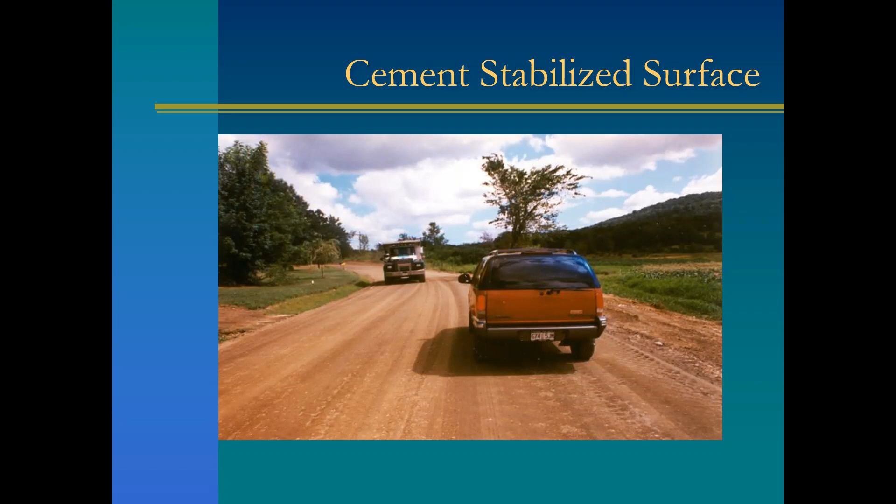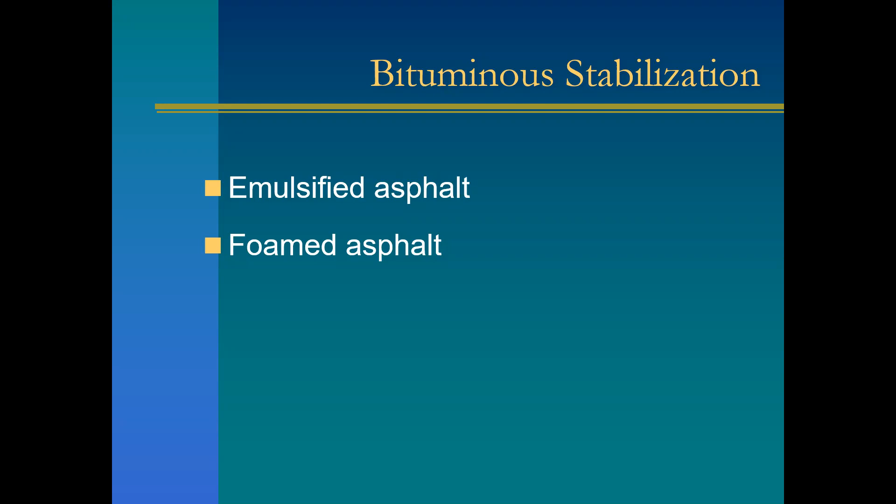Bituminous stabilization, this is where you're going to use either an emulsified asphalt or a foamed asphalt. In this case, you're not cementing the fines, you're binding them up. It's more of a binding kind of operation, but it still reduces the characteristics of those fines. With emulsified asphalt, you add emulsions 2 to 5% by weight, with quite a bit of water in there, of course. It's got to cure out. So you need to do that just like you do with any emulsion product. You need to do it in the summer, not too late in the season, because it won't cure out otherwise.

And the moisture content is absolutely critical because you've already got water in the emulsion, and if you add too much water, you can actually have a hard time compacting it because now there's too much water in the mix when you're done. So that could be pretty critical. You may have to reduce the amount of water in the emulsion. In fact, sometimes they'll actually do that as part of the process.

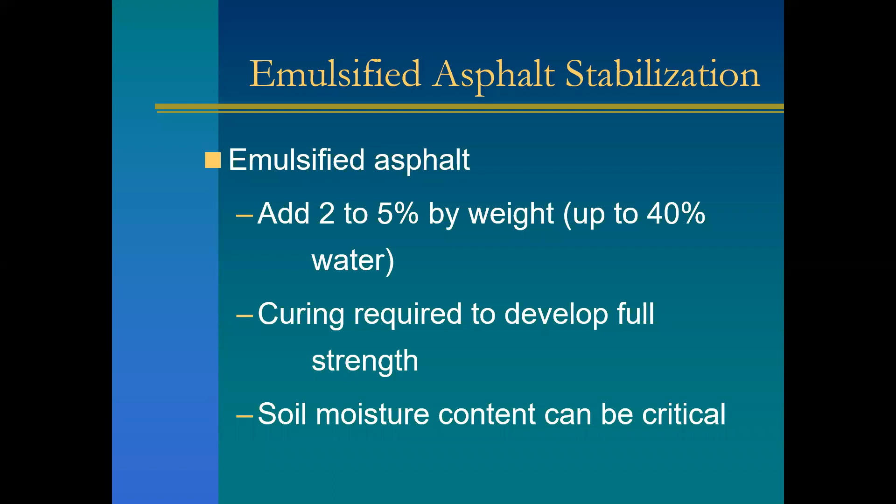With foamed asphalt, similar, you're going to be adding in 2 to 5% foamed asphalt. You're going to also add a little bit of cement. Because you add that cement in, you don't have as much curing issues. It cures out almost immediately, so you don't have that soil moisture issue as bad.

And you get almost all the strength pretty quickly. And so that's actually pretty cool with foamed.

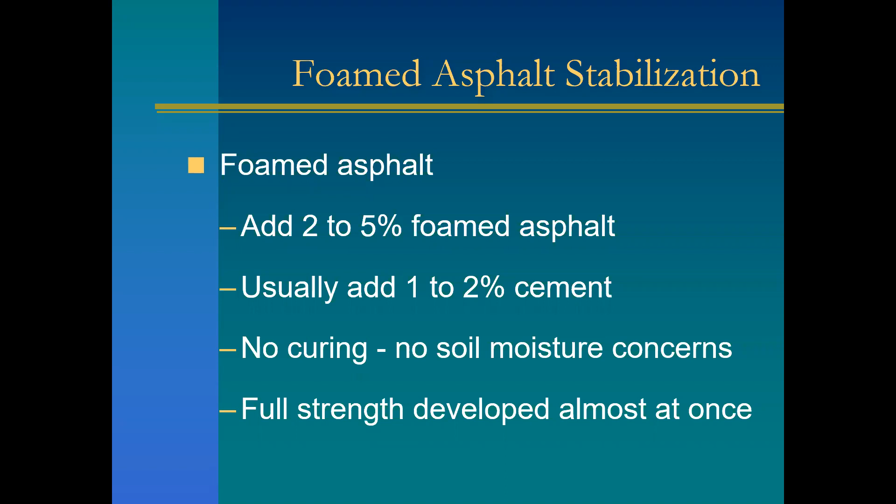And let's see if this slide will play today here. You going to play today?

Nope, it's not going to play today.

You're injecting air in when you inject the asphalt, and it foams up. Do you remember in elementary school, kid? Did you have, Ed, milk that you got with a straw? Of course, 3 cents. Did you ever blow into it and make the bubbles? Absolutely. It's the same technique. You're just doing it with asphalt, and you're doing it at a lot hotter temperature, but it's the same concept. You're making big bubbles, and those bubbles have surface area, and that allows you to cover the rocks and the aggregate better. That's what you're doing with the foaming process.

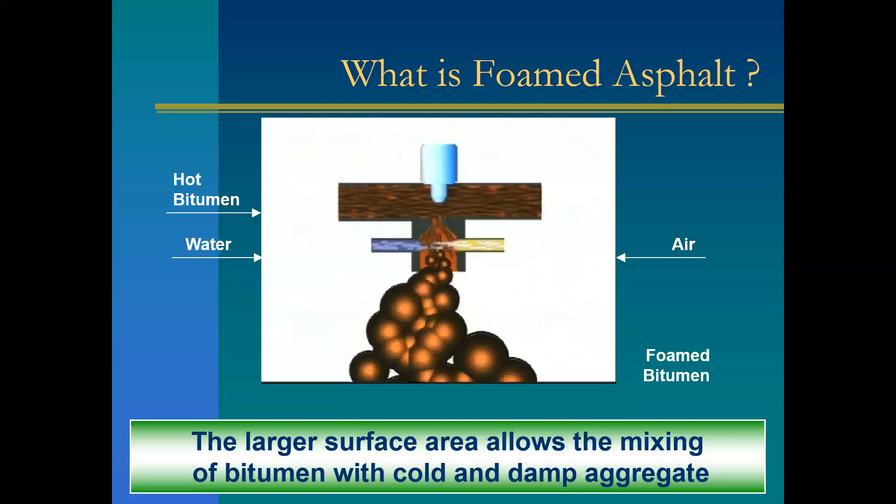So it's pretty cool. Yeah, the coating is almost 100%. Yeah, and that's the key. You got to coat all the stuff that you want to take care of. And then the foaming process, very similar looking, just like we'd had before with a train, but instead of adding in cement, you're adding in foamed asphalt in this case. But again, just like with cement, you don't want to add too much because if you add too much asphalt, what do you think is going to happen? You've seen that happen, Ed? Have you seen it where they put in too much asphalt? Rutting and flushing. It's an unstable mix. It can actually create little asphalt globules that'll sit in the mix. It's a mess. So yeah, you need to pick the right candidate with FDR.

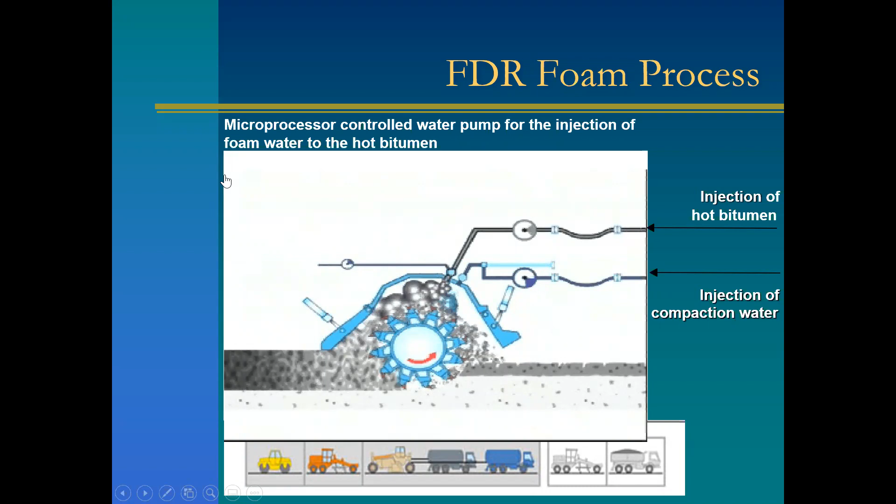How do I choose between the different choices? Well, again, look first at the fines content. You've done your test samples. You look at the fines content of the mixture after you're done. That mixture includes the asphalt that you mixed into it, so it's a mixed fines content. If it's low enough, you can just add rock, you're done. Assuming you don't have a really poor silty material, that's where the plasticity and the sand equivalent come into play, where you want to have no plasticity in your mix. If you've got 10 to 15% fines, we want to get that down under 8, preferably under 5 for the fines content. So you could add in some asphalt to help bind up some of the fines, again, as long as you don't have too much plasticity.

The key there is if it gets too much in the way of fines, then you have a problem because now the asphalt gets all absorbed by the fines and doesn't really do the job of coating all the rocks. So that's why there's an upper limit there. And there's not much point in doing it if it's a low fines content. You might as well just add rock or calcium. Calcium can work as high as 20%, but realize you're still going to have a fines problem. And so if you've got a drainage problem underneath, a lot of water issues, or if it's too thin, calcium may not do what you think it's going to do. It'll help with frost susceptibility, but it's not going to make it any stronger the rest of the year. So it has its place.

Cement works pretty well, 12 to 20%, with some tricks you have to do depending upon the plasticity involved. And again, lime fly ash, the reason we don't typically see a lot of it here in New York State, even if we were doing a lot of the other techniques, is you have to have plasticity. You actually need the plasticity for the lime fly ash to react. And if you don't have it, it doesn't actually create the binding, the cementitious chemical reaction that you need.

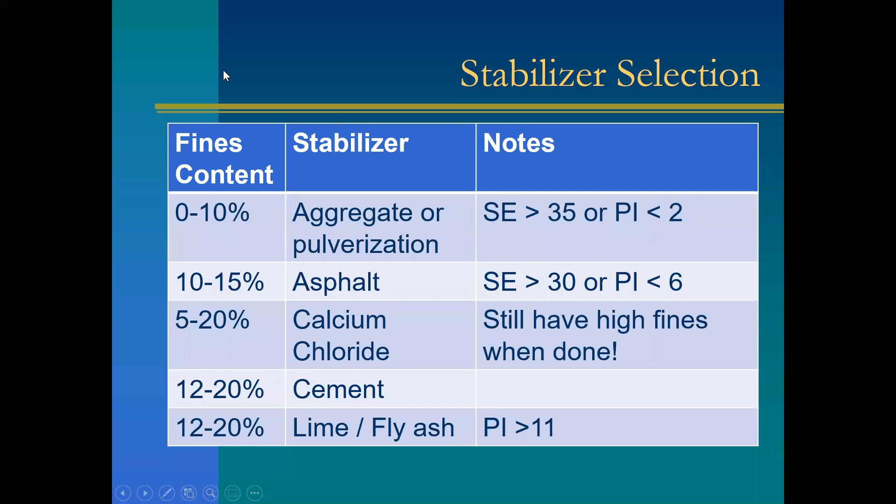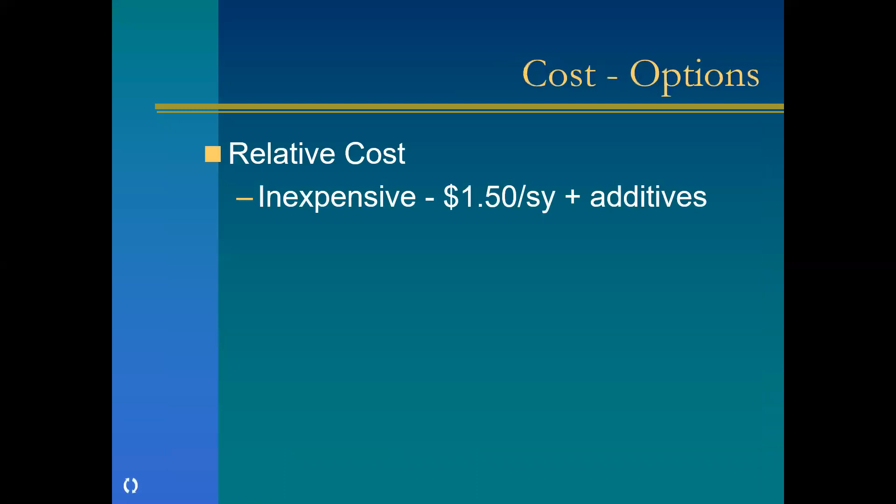So Ed, I'm going to let you talk a little bit about the cost. Okay. Most people would say that FDR is relatively inexpensive.

You get to treat 6 to 9 inches of the pavement and base material for $1.50 a square yard, plus your additives, which usually add anywhere from $1 to $3 a square yard. And that's all well and good until you have to put your overlay on there. And your overlay cost is where the money really is.

Double or triple chip seals will cost you anywhere from $4 to $6 a square yard. And hot mix will be somewhere around $10 to $14 a square yard with hot mix at $60 a ton. Now, in order to prepare myself for this, I took a look at some bids through OGS for hot mix asphalt in place, and the numbers were just all over the place. It was anywhere from $60 to $95. So I use 60. If you're at 80 where you are, well, you can just do the math.

But remember, you still have to consider proper maintenance for the overlay after it's done, which is chip seals have to be redone at certain time intervals. And the hot mix is going to have to be crack sealed probably a couple of years after you do it. If not, take a look at it and make sure that you're right on top of those cracks when they do develop. Well, the thing about this is when you're done with FDR, though, is you've got a base that can actually now help carry the load. That's the key at the end of this process.

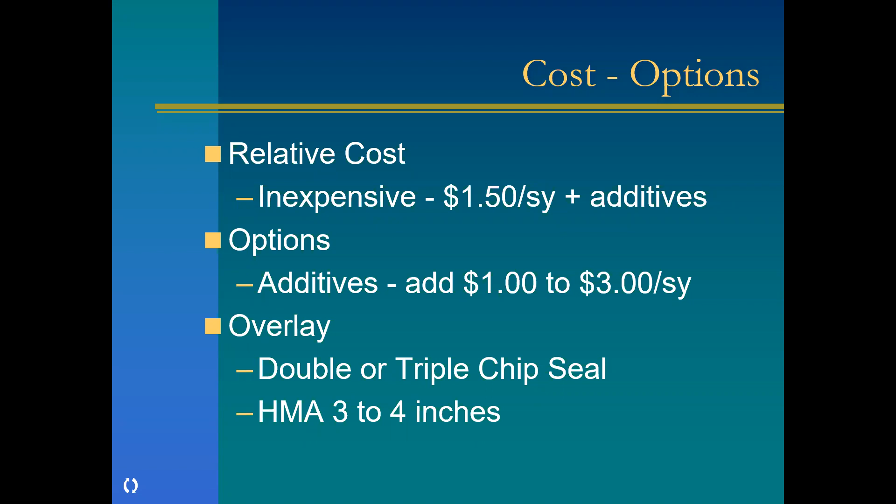Okay, ready for the next one? Let me stop these results. We'll come down here. Okay, I'll relaunch the polling. Okay, let's try again. You think that's a good candidate or not?

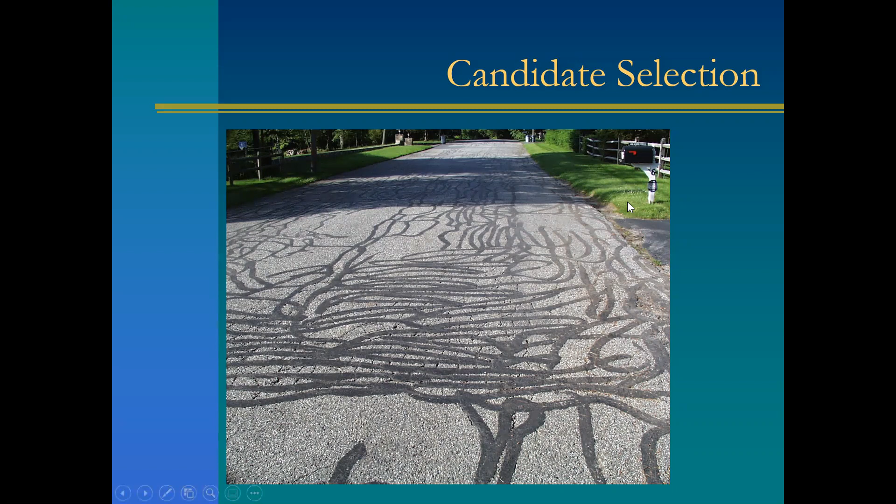So somebody else put in there, is that a good candidate for heater scarifier? Possibly, as a technique. The challenge for heater scarifier in that particular case, because it's residential, I don't want to burn the grass or the flowers, but it's a possible. Depends on overhanging trees too. It does depend on overhanging trees, yeah. So that's why it's important to have a history, to know how old this is. The one thing it definitely was not a good candidate for was what they did do, which was crack repair. So looks like they missed most of them too. They did. It's pretty sad.

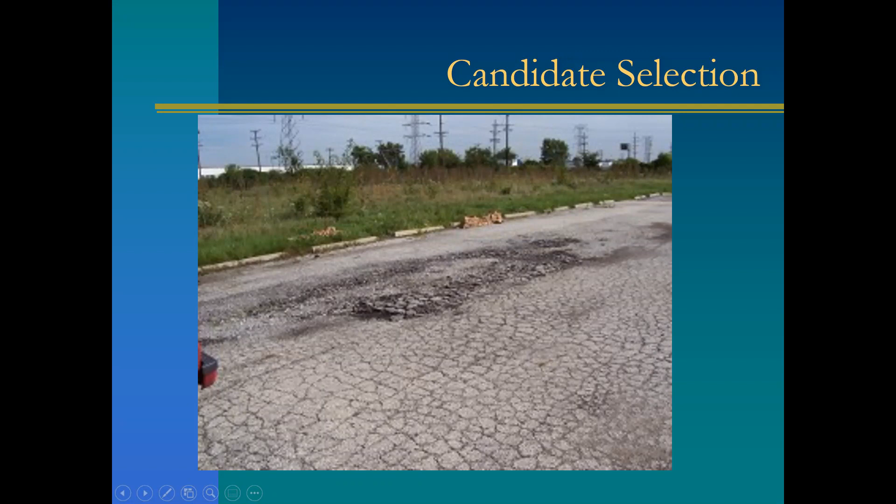Now, in the interest of time, we're getting close to our hour, and we had a whole bunch of choices for candidate selection, but we also understand your time. So we'll have a little bit of fun here with one last candidate. We'll relaunch the polling one last time and see if anybody else has any comments in the Q&A pod.

I don't know if they saw it though, Dave. I can move it. You can move it. You can drag the thing out of the way if you need to. I'm still learning this Zoom stuff. I know, it's okay. Isn't technology fun?

So we got about half the people voted here. And we'll end and share the results. So some say yes, some say no. Okay. And a bunch of maybes. I think I would be a little bit worried about our friend Mr. Gator there myself. Well, it's a very, very short little photo; you don't know what else is going on the rest of the road. So I think maybe it's a good idea. Yeah. Well, and that's the whole point, is we need to do tests. We need to look at it. FDR is a great technique. It has its place, but it's not a perfect candidate.